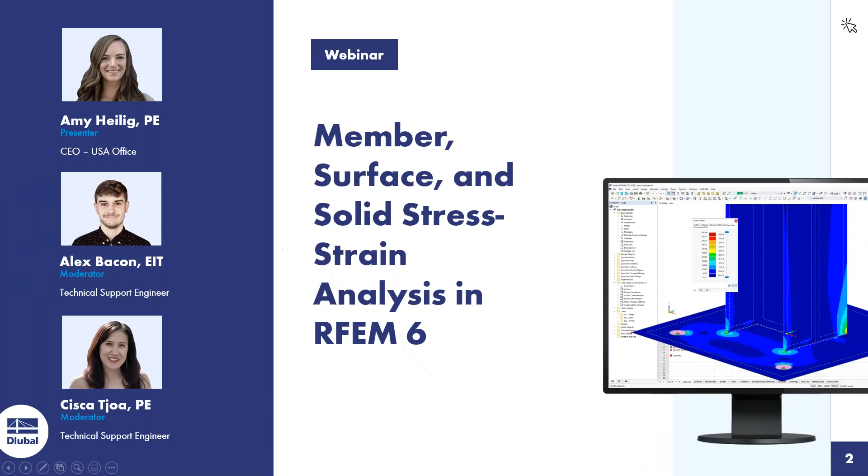Today we'll be working in our structural analysis and design software, RFEM. The topic for today's presentation is member, surface, and solid stress-strain analysis in RFEM 6.

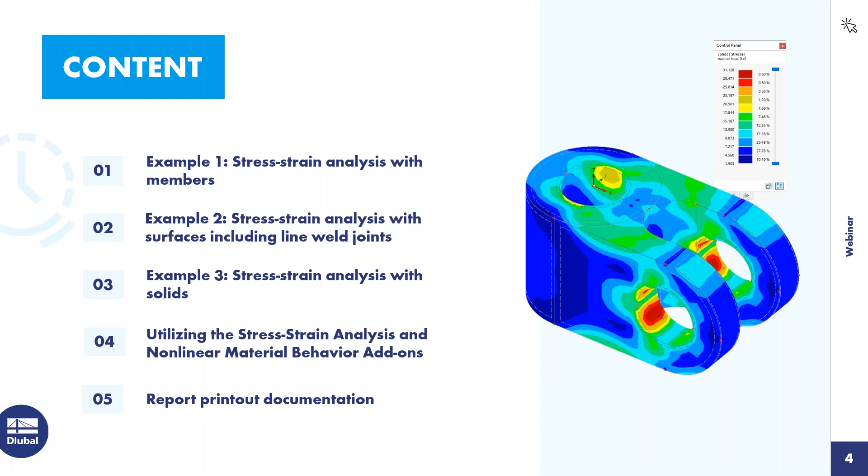Starting within our main program RFEM here, I've already created the first model and given it a model name. The type of model is set to 3D, and under the add-ons, this is where we want to activate the stress-strain analysis add-on.

These are all the multiple add-ons we could purchase with our RFEM license, so we'll be starting with this one for today. Once we've activated that, we can see our 1D member elements modeled here in the graphical window. If I turn this into wireframe view, these are all one-dimensional elements, representing some type of facade wall.

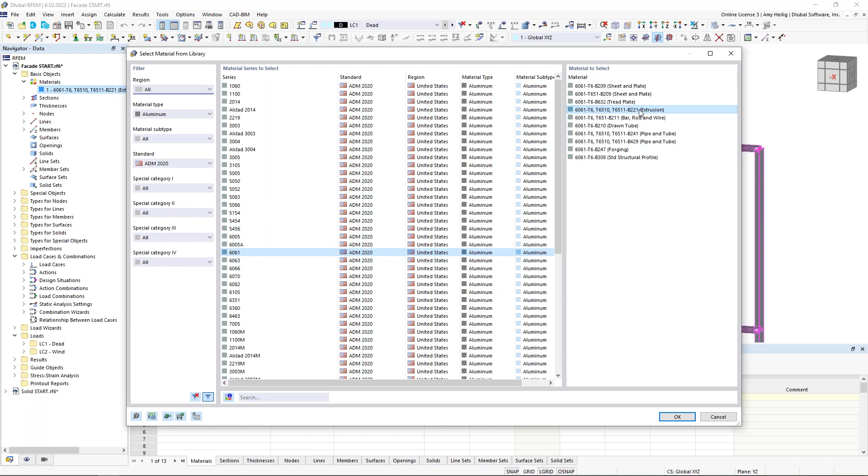I have defined the material here for all of these members as 6061 T6, which comes directly from the ADM standard. If we take a look at the material database, notice I use my filters on the left to filter to the ADM, and under the 6061 category, I chose this particular material for extrusions.

If we take a look at the cross sections defined within this model, we have a couple of them here. These are basic parametric sections where I can input the dimensions, and the program will automatically calculate the cross-section values for me. Same concept for the second cross-section, notice I just rotated it 90 degrees.

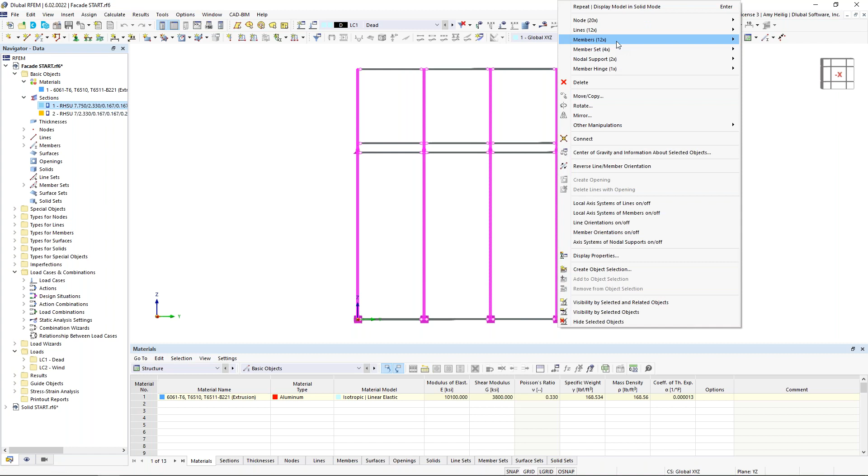I have modeled all of these members, and the program has gone ahead and broken some of these apart. Perhaps we'd like to design these columns as one continuous member. Even though those members are broken apart, it's not a problem, as we can create what's called member sets. If we highlight all of these single elements and want to design them as one continuous member, we can right-click, and under the member option, we have create member set. The program will automatically group all of those together, and now we see them available in our navigator on the left.

I also want to go back to our base data by right-clicking on the model name. Under the settings and options, I'm going to turn on the member representative and the member set representative. Notice we have a couple additional tabs at the top. The program can group together members that have similar materials, cross-sections, lengths, as well as several other options. Once we activate these member representatives, we also see them available on the left-hand side. If I turn this into wireframe view, we'll also see red and blue symbols grouping those similar members together.

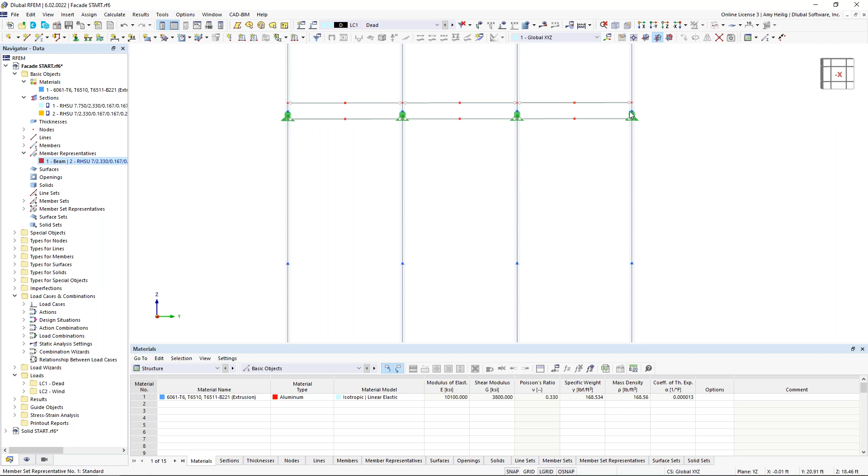This will come into play later on with our stress design. I've also applied a couple of supports here. You'll notice the nodal supports applied at the center line of these small segments, and then we have a sliding nodal support down here at the bottom. Now moving on to the loads.

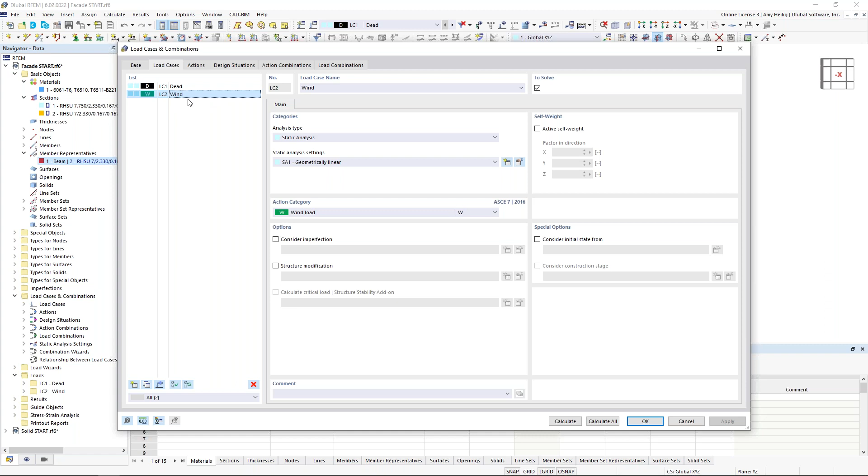I have created two basic load cases for our facade wall here, just a basic dead load. Notice self-weight is active, and I've also created a wind load case. Once those load cases are created within this dialog box, we would actually apply the loads to the structure, and for the sake of time, I went ahead and did that.

If we turn on our loads for dead load, you can see that this facade wall is likely going to be supporting some type of glass panel. So I wanted to attach the glass panel and represent them as basic point loads along these horizontal members. If we double click on these loads, you'll see here that we can set the load type to force, but the load distribution is set to concentrated, where I can set the number of point loads along the member length. So I set the magnitude here at -0.8 kips in the global Z direction, with 2 point loads along the member length set at a distance of 10% of the member length, then an additional 80% of the member length.

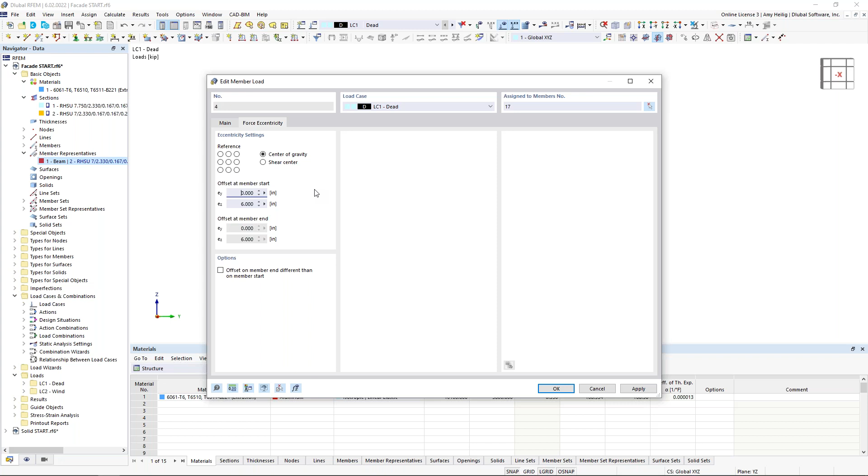With these glass panels that we're trying to represent, perhaps they're not necessarily applied right at the center of these members. So we have the ability here to turn on the eccentricity of these point loads, and now we get an additional tab here where we can apply an eccentricity. I've set this to 6 inches in the local Z direction of the member based off the center of gravity, so now we have an additional torsional moment applied to these members based on these glass panels being attached there. You can also modify this to the shear center as well.

I've applied these point loads not only to the bottom horizontal members, but you can see them applied up here, the upper members as well.

Moving on to the wind load, we can see that wind load generated here as a lateral load, and I took advantage of our load wizard over here in the project navigator and what's called the member loads from area load. If we take a look at this applied load, you can see here that I've set the load direction in the global X direction based on the global axes. The load magnitude is set at 0.02 kips per square foot.

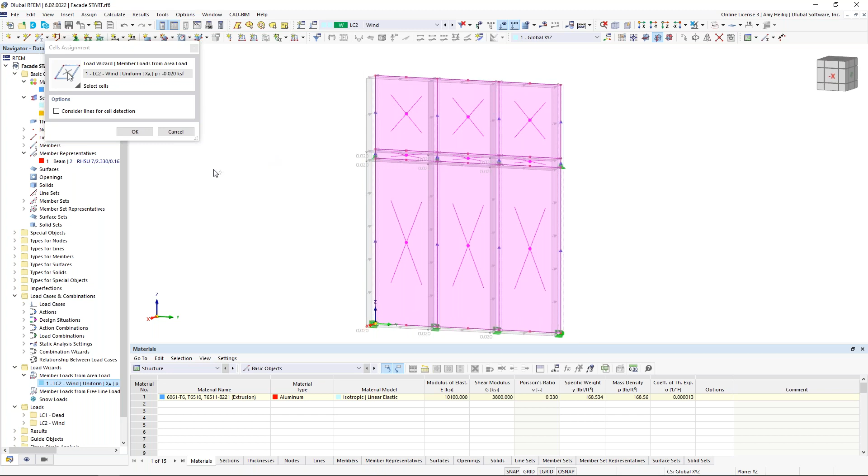Under the second tab, this is where we have two options: either we could use the ability to select the corner points of the area load, or we can select the cells graphically. The program can actually detect here these closed cells between members, and we can graphically select them with our selection options. When we do this, all of those cells are automatically populated within this table. So what we'll see here is that applied lateral area load based on a closed area for these members shown here graphically, and we can always right click on this load to display separately.

Essentially this is going to be the member loads that are applied based on the tributary area of each one of these members, but we can always right click here to uncheck this display separately for a little bit of a cleaner look there.

Now that the loads have been applied to the structure, let us go back into our load cases and combinations, and we're gonna back up a step under this base data. Currently I'm generating the load combinations automatically according to the ASCE 7, but you can see here we can select the NBC, Eurocode, and many other international standards. When this option is checked, those load combinations will be automatically generated according to the standard.

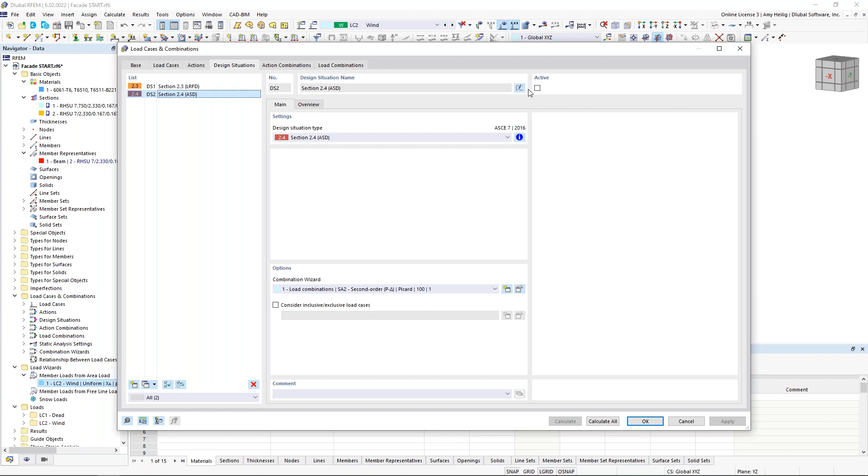The design situations are really important. We have two design situations automatically created: LRFD for our factored load combinations and ASD for our unfactored load combinations. Notice we activate these design situations for the add-ons, so the add-on that we turn on, remember, was the stress strain analysis. We'll be using this design situation once we get into that add-on for the design portion. Now, if I'm not so interested in my unfactored load combinations, let's say serviceability is not really a concern, we can delete this design situation, or we can simply deactivate it up here in the upper right-hand corner.

Under the last tab, the load combinations, this is where we see the load combinations individually listed out based on the ASCE 7 and only according to the load cases we have defined: dead load and wind load.

Now that the load combinations as well as the design situations are set, what we'd like to move on to is the stress strain design configuration. We're technically ready to run the analysis, but the huge advantage of RFEM 6 is the integration of these design add-ons so that we can run one continuous workflow.

What I'd like to do is right click on my folder here to collapse all these folders so maybe it's not so overwhelming. Because we've activated the stress strain analysis add-on, we now see an additional folder on the left, and included in this list is what's called the member configurations. We'll double click on this to take a look at the default options. Notice these are all of the available stresses we can calculate for these members.

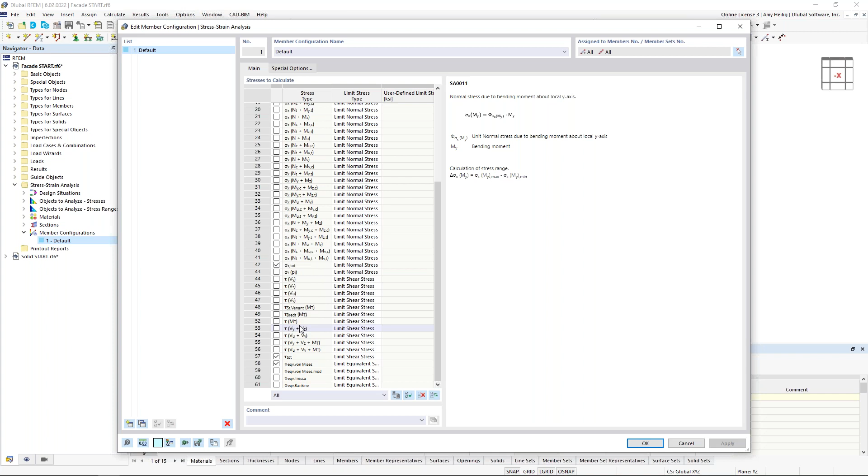That includes normal stresses based on axial loads and bending loads, and the list is rather long, but we've taken the liberty to suggest a few of these stresses you might be most interested in. For our example today, let's assume we're only interested in designing the von Mises stresses.

So when I take a look at this, I make sure my checkbox is on, and notice for all these stresses, the equations along with the variables are listed over here on the right. In the second column here is where we set the limit stress type.

Currently it's set to the limit equivalent stress. What this means is the program is going to refer to that ADM material to determine what the limiting stress value is. Alternatively, we can set this to user defined, and simply type in the user defined limit in this third column. But let's leave this for now set at the limit equivalent stress.

The other nice thing about these configurations is that we can give this one a name. We'll call it von Mises. We don't necessarily have to apply the same configuration to every single member in the model.

So if I'm interested in applying the von Mises here only to my vertical members, I can graphically select them here, and once I click OK, we'll see those members populated in the upper right-hand corner.

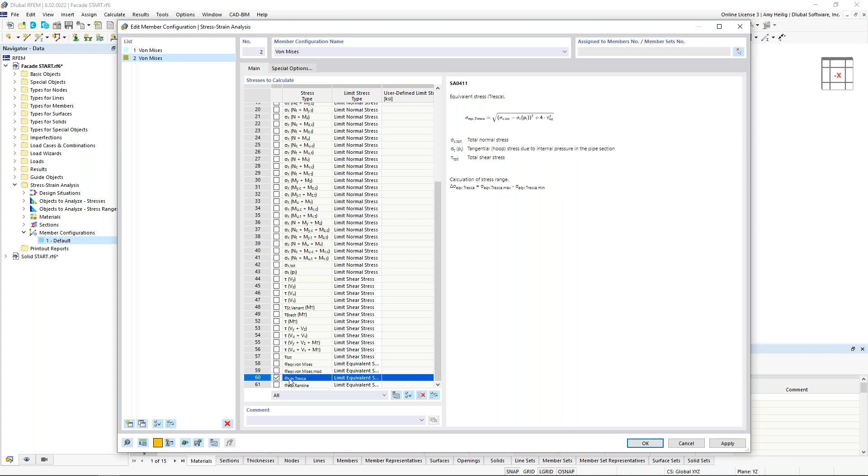Now I can make a copy of this configuration, and instead of von Mises, let's turn on the equivalent stresses based on the Tresca hypothesis theory. We see the relevant equation here that will be used. We can give this one a name: Tresca.

And we're going to assign it to all of our horizontal members, so we can select these members one by one using our selection box. Once we're done with this, we click OK and see the members populated in the upper right-hand corner.

So we're now ready to run our calculation. We can go to calculate, calculate all. The program will generate the mesh, move through the load cases and combinations for the static analysis, and then move through the stress design.

Once this calculation is done running, you'll notice we can view any one of these load combinations, for example, from our drop-down menu. Over on the left, we have both the static analysis and the stress strain analysis. So if we start off with the static analysis, we can view information like our global deformations and support reactions.

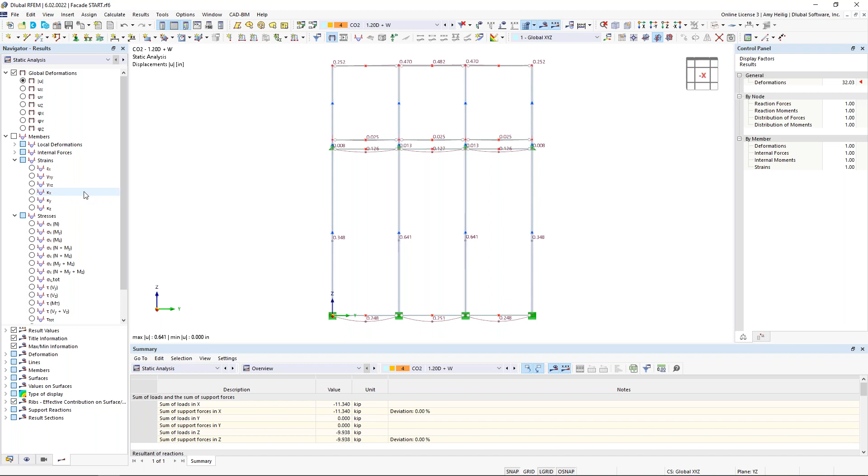But of course we're also interested here in all of the available stresses, so we can view these on the member, including normal stresses, shear stresses, and of course the von Mises stresses. Again, this is the static portion of the analysis.

But we're also interested in the stress design based on those configurations we've just set. So we can jump to the stress strain analysis within this dropdown, and if we take a look at our table results, you'll notice we actually get an error for each one of these stress ratios. It simply says non-designable.

So we'd like to take a look at this in a little more detail. I'm going to go into my result details here, and this gives me a bit more information. It tells me: no limiting stress defined, please correct in the member configurations.

Well, if we refer back to our aluminum material, I'll visit this here under the basic objects, the materials, and take a look.

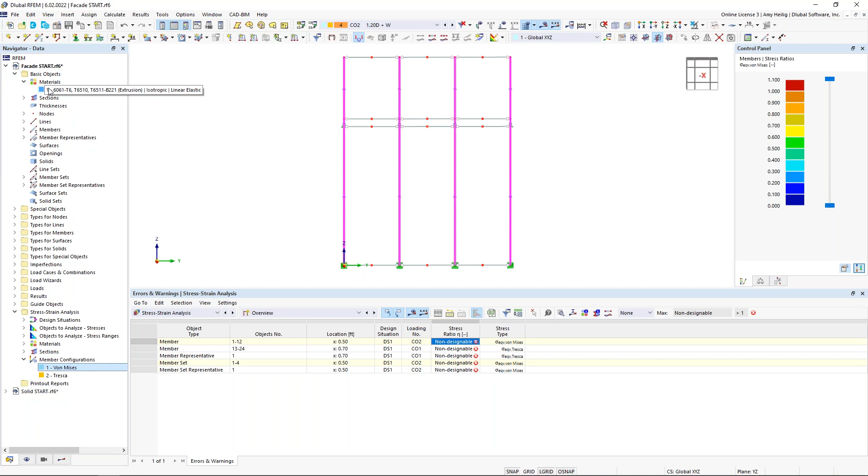You'll notice that the material values have many different values set here under the strengths, depending on if the member is in tension, compression, shear, and so on. So aluminum materials are a little bit different than, say, what we would see with steel. A36, for example, has a very clear yield strength of 36 KSI, but aluminum ADM materials do not. So the program simply doesn't know which one of these to refer to.

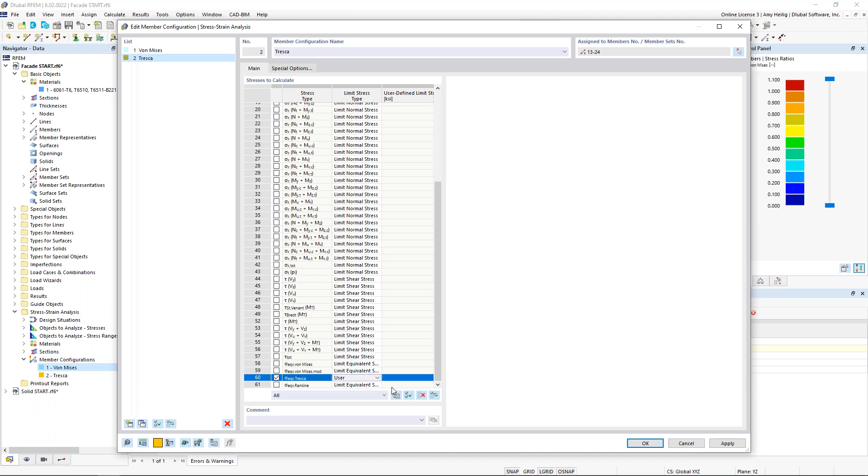So we can easily fix that here by going back to our member configurations. And under our von Mises configuration, instead of using the limit equivalent stress, perhaps we set this to user defined instead, and we pick one of those strength values for that ADM material, such as 35 KSI. And under the Tresca, we need to do the same thing, so we'll set this to user defined, and we'll also set this to 35 KSI. And we click OK.

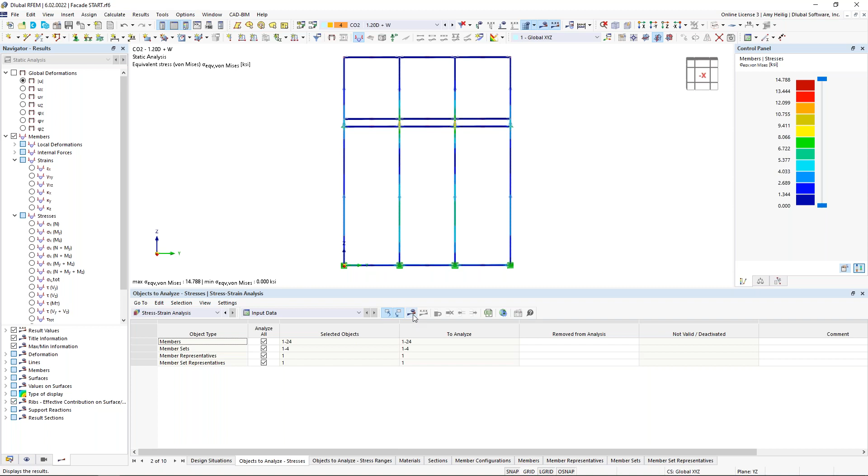So if we revisit here our stress strain analysis, we see here our input data, and we see the design situation. Remember that LRFD design situation, and we're designing all of our members. So our static analysis remains the same here, but we do need to rerun the design portion according to this add-on.

So we'll go ahead and initiate that, and now we should see some results here available in our table format. And we can take a look within this dropdown, the stresses on members. So we look at the tab here, stresses on members, and sure enough, we have our column here of existing stresses for each of these members, but we also have the limiting stress of that 35 KSI, and ultimately we're getting a stress design ratio.

Now we also can view these stresses by member set. So remember those continuous members that we created for these vertical columns, we're also going to see our stress design ratios for each one of these continuous members. If you also remember, we activated the member representative, and we're only getting one value here.

And we can think of this more so as an envelope solution. So we're grouping together all of those horizontal members, and we're going to give you one value here for the existing stress, the limiting stress, and the stress design ratio. Same concept for the member set representatives.

The other thing that we can view for any one of these results here in our table format is to take a look back at these result details. If you remember, this is where we got more information about our error message, but now that it solves, what we actually see is the stress ratio. We see that same equation given to us on how we're going to calculate, for example, the von Mises stresses. We see all of our variables given.

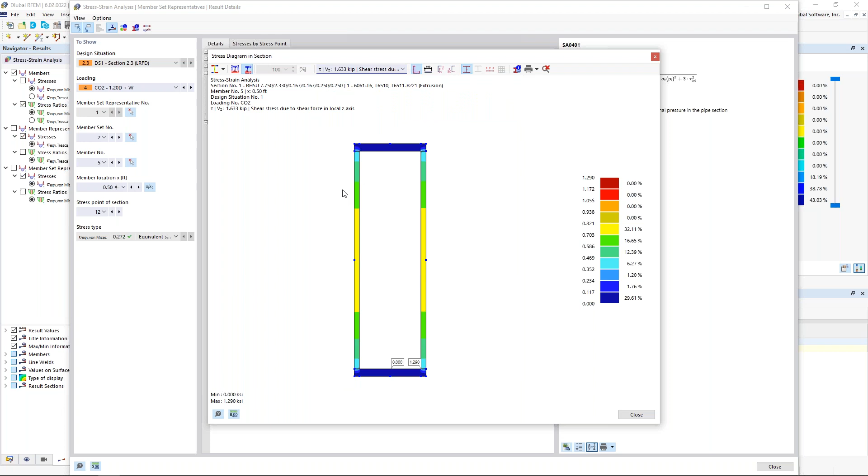And the stresses option is going to allow me to view all of the normal stresses. Perhaps I want to take a look at the shear stresses. So we can add this information to our printout report and just get a little bit more information about what's going on for this particular section at this X location.

Now, of course, in addition to the table format, we have all of our information shown graphically here under the stress strain analysis. For example, we can view the stress design ratios that are currently turned on according to Tresca, or perhaps we want to turn on the stress ratios according to the von Mises.

Okay, so that will wrap up this first example with one-dimensional members.

For our second example, I'm actually going to create a new file because we will model this one from scratch. Pretty basic structure, so we'll give this the model name of base plate, whatever that may be. And the type of model will be set to 3D. And under the add-ons, again, we want to activate the stress strain analysis. And we're also going to activate for this second example, the nonlinear material behavior.

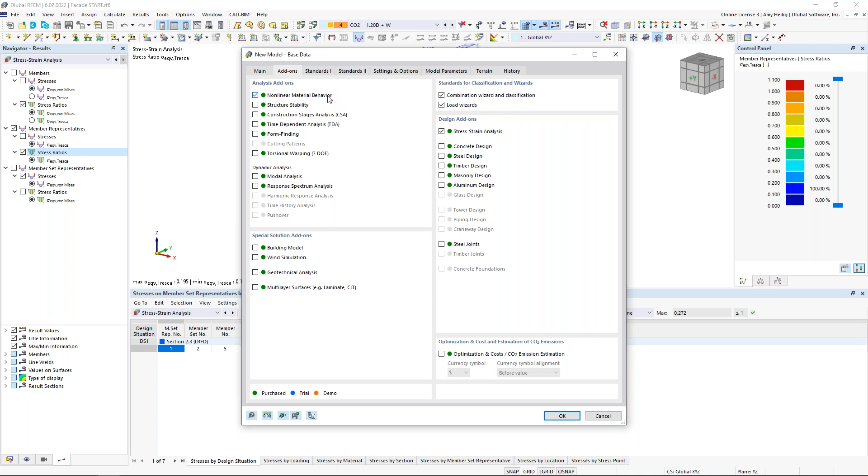So we'll get into this a little bit later on, and we can click OK. Now we're presented with a brand new model here within RFEM.

The first thing I'd like to do is right click on my grid settings down here at the bottom. Currently everything is based on a spacing of 1 foot. I'm going to go into my units, and instead of using feet, I'll change this to inches since we're working at a much smaller scale. I click OK, and instead of the grid point spacing at every 12 inches, we'll set this to every 1 inch, and click OK.

So we zoom in here, and now we see our much smaller drawing grid. We'll begin by drawing a new surface within our toolbar up here, and we'll choose rectangle via center.

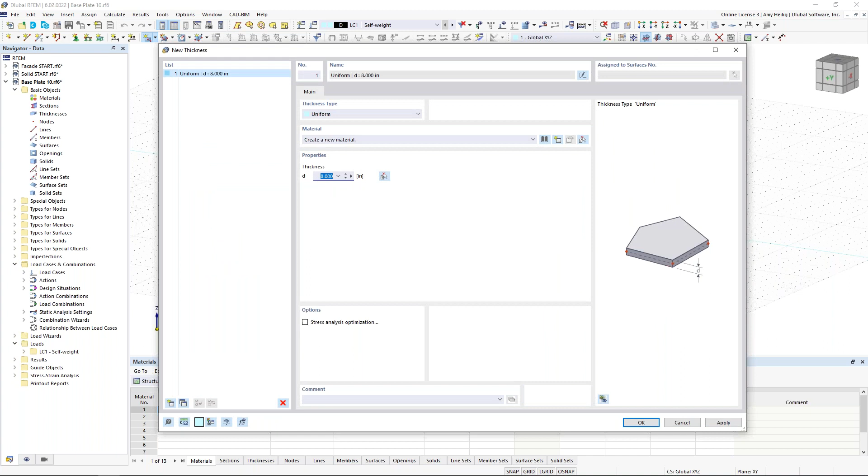We need to generate a new thickness and material for this surface, so we create a new definition type here. The thickness is going to be set at 0.5 inches, and we need to create a new material from our material database. We can use our filters on the left to choose steel, the AISC 360, for example, and choose A36 for plates. Now that this thickness and material have been defined, I can click OK through these dialog boxes.

I will snap at the origin here, and make my second click at a point of 10 inches in both the X and Y directions, and we have our first 2D surface element generated here.

Now I'd like to add in some openings. This will essentially be our base plate, and we add the openings to represent where those bolts will connect the base plate to the underside of the surface.

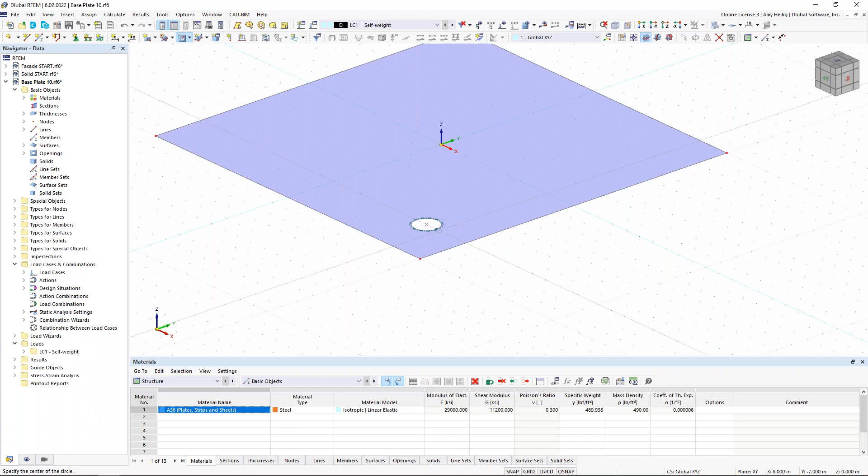We can do so in a similar manner by creating a new opening, and we'll choose the circle option. Then I can simply click directly on my drawing grid, and set my radius by typing it on my keyboard, such as 0.75 inches. I hit enter, and now we see that opening generated here on the surface.

I'm going to represent my bolt elements with a new nodal support. So I create a node to begin with by directly clicking right at the center of that opening. I right click to exit, and we're going to create a new nodal support.

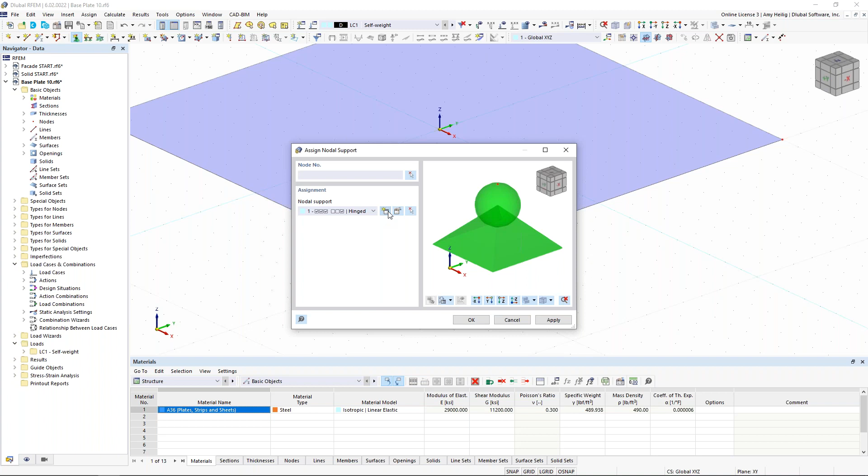I'm going to generate a new nodal support definition here as well. What I'd like to do is restrain translation in the global X, Y, and Z directions, but release rotation about those global X, Y, Z. So this pin nodal support is going to represent that bolt taking over those tension forces. I click OK once again.

I'll snap here to that newly generated node. I right click, and we can even right click on the display of this nodal support to decrease the size to something much smaller, so it kind of fits in with the size of our base plate here.

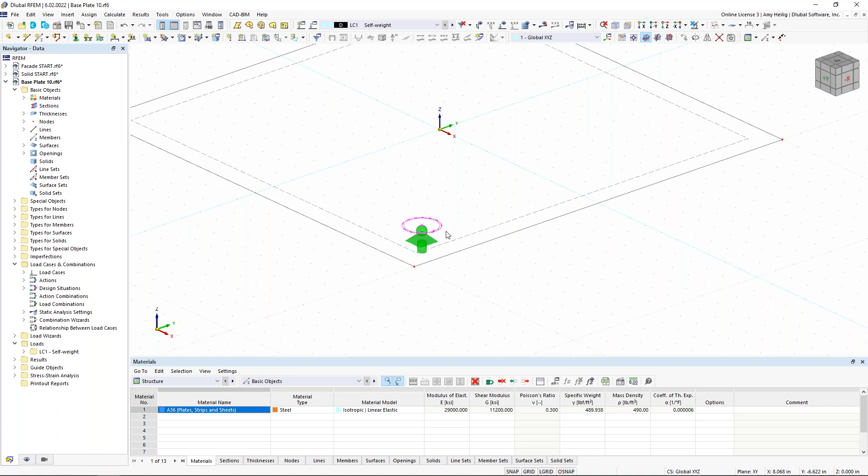I'll convert this to wireframe view, and highlight all of these elements that I just generated. What I want to do is make a copy of the opening and the nodal support. So we'll go to our rotate copy tool. We will create 3 copies, rotating 90 degrees about the origin. We click OK, and now we can see the rest of those openings and nodal supports generated here.

Now, the problem is that none of these nodal supports are currently connected to the base plate. That's just because they're sitting in the middle of these openings, but it's not a problem because what we can do here is choose the option to create a new surface by selecting the boundary lines.

Instead of the stiffness type being set to standard, we can choose this option here, rigid. So we'll fill in those openings with a rigid surface. Notice I don't set a thickness, I don't set a material. That's simply because the stiffness is really, really high for this particular stiffness type. So when I click OK, I can simply click around these openings here to essentially connect that nodal support back to the base plate.

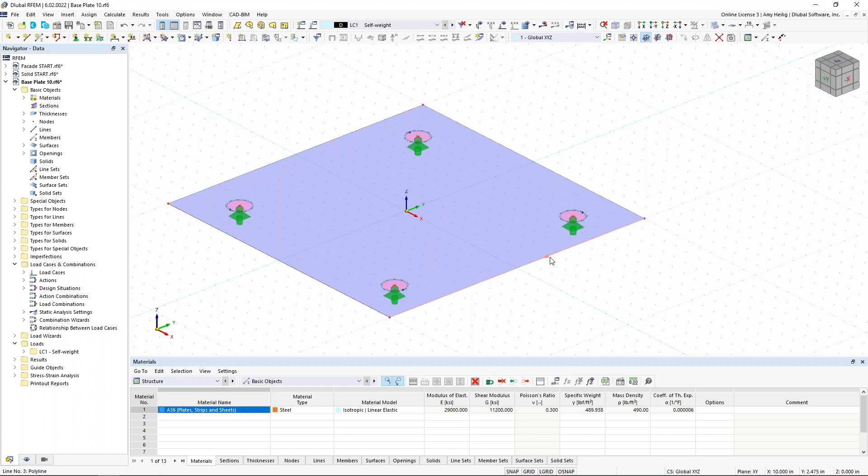So now we'd like to move on to modeling the column element. There are many different ways to do this, but I'd like to show you a quick trick we have in the program. I'm going to modify my drawing grid in the vertical direction, which we can see clearly in our graphical window, and create a new single member, exactly like what we just saw in the previous example. It's a one-dimensional element, so under section is where we create a new cross section.

Instead of one of these parametric sections, I'll take advantage of a standardized section, which allows me to once again use my filters similar to our materials on the left-hand side. I can filter, for example, to AISC 15, and choose a W shape. We scroll all the way to the bottom since all the shapes are listed, and choose a W8 by 35.

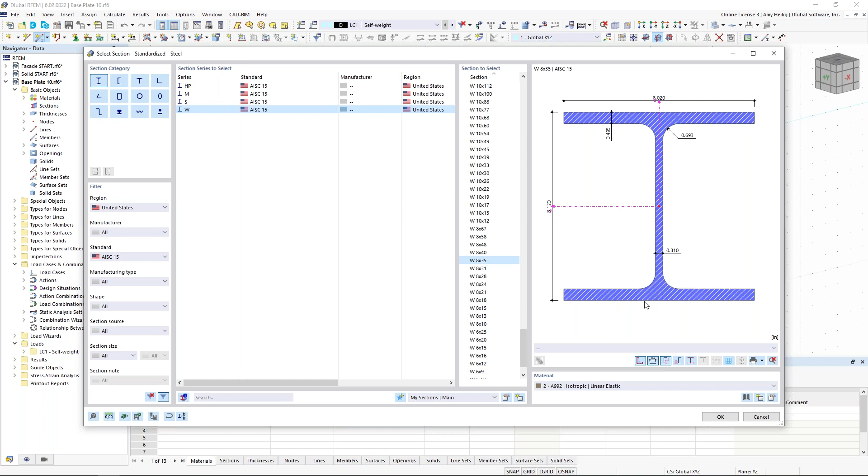Now we also need to generate a new material, so we access our material database once again using our filters on the left, but this time choose A992. Click OK, and that new material is now associated with this W8 by 35. I click OK, and through these dialog boxes I snap at the origin, with my second point up here at 40 inches in the vertical direction, and we have our column generated.

But the problem is, when I turn this to wireframe view, this member is just a one-dimensional element modeled at the centroid. We want to convert this to 2D surfaces so we can do an in-depth stress analysis and design. In the program we can right-click on this member, and under the members menu, generate the surfaces from that W8 by 35. Notice everything was converted to those 2D surfaces - the flanges, the web, everything from the W8 by 35, including the thickness as well as the material - so we don't need to make any modifications, assuming we still want that same cross section.

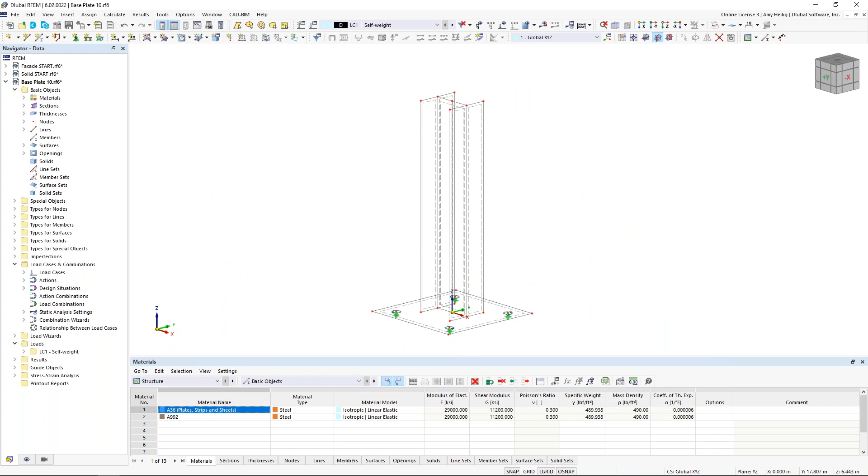Now that we have modeled this column, we need to apply a surface support down here at the bottom. With downward deflection, this base plate is going to bear on some other type of surface that we didn't model today. But in uplift, we want that surface support to fail, and instead we would expect our bolts, represented here with our nodal supports, to take over those tension forces.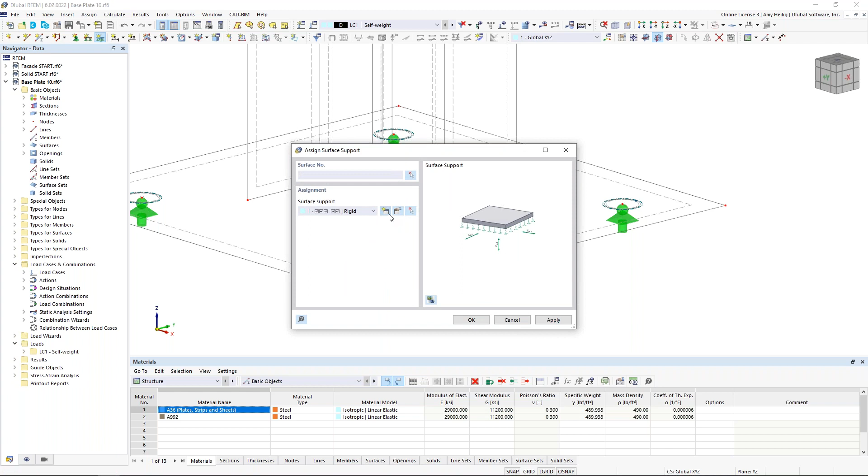So we create a new surface support within our tools, and create a new definition type. We'll restrain the shear based on the local XZ and YZ axes of this surface. For my vertical translation, based on the local Z axis, I'll set a spring constant of 1e6. It's really recommended in almost all cases with a surface support not to fully fix it in the vertical direction - we get better convergence in the calculation when we set a spring constant instead.

And of course we want to take advantage of this nonlinearity. RFEM is a nonlinear analysis program, and all geometric nonlinearities are automatically included in the base program. So this is where we can set failure if positive contact stress occurs in the vertical direction. With uplift, we should see that support completely fail, but with downward deflection, that support will be engaged again. We click OK, snap on that base plate, and see the surface support applied here.

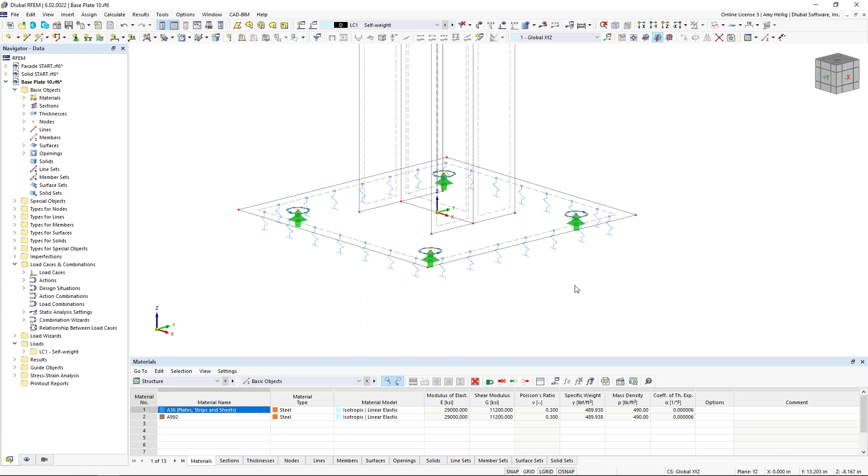Similar to the nodal supports, we can right-click and use our slider to decrease the size of this, and we can also increase or decrease the number of elements we're seeing here depending on what we see fit for our model. All right, so essentially the modeling portion is complete.

Let's touch on the FE mesh. If I go to calculate, generate mesh, you'll see that the mesh is entirely too big - we're getting very few mesh points, which in turn is not going to be an accurate analysis. So it's very clear that we need to refine this FE mesh.

Once again going to calculate, we have mesh settings. Instead of the default 1 foot or 12 inches for the target length, we can set this to something much smaller, such as 1 inch. I click OK and apply, and the program will generate that FE mesh, which looks much better. But if I zoom in here on these openings, I really only have 4 mesh points around the circumference.

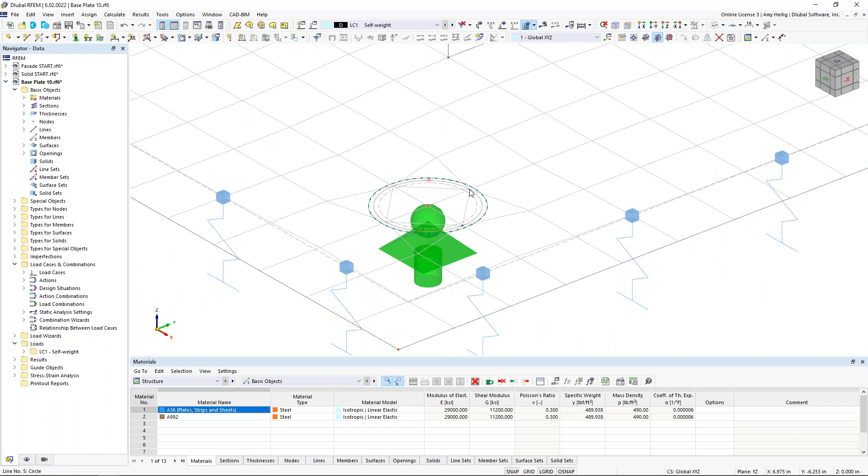Perhaps we want to refine the mesh a bit more around these openings. I can hold down my control key to select all 4 of these nodes, double click, and activate the mesh refinement under these node numbers. Now we get a new tab where I can create a new nodal mesh refinement. We set the radius of this nodal mesh refinement to 3 inches, the inner target length to 0.1 inches, but transition back to those global settings of 1 inch. I click OK twice, and now we see that FE mesh refinement symbol shown graphically within the model.

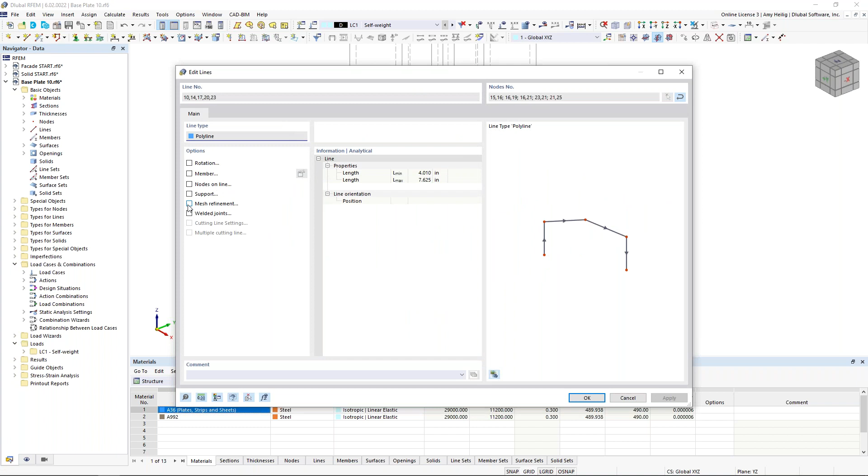Perhaps we'd like to do the same thing at the base of the column and refine the mesh a bit further around these lines. I hold down my control key to select all of them, double click to edit the line, and in a similar manner to our nodes, we can activate the mesh refinement for these particular lines. Under the mesh refinement, we create a new definition and set the target length to something like 0.2 inches. I click OK.

Then we can finally go to calculate, generate FE mesh, and we'll see a much more refined FE mesh at the base of the column as well as around those openings. So everything seems to be good to go now.

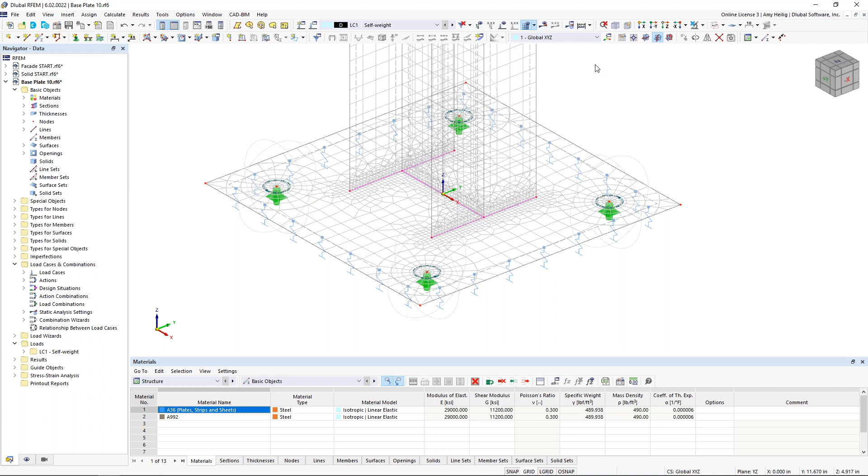Moving on to loading. Essentially what I'd like to do is visit my load cases and combinations. We have a default load case that's always created called self-weight. Let's go ahead and rename this one to dead load, and we can leave the self-weight active here. I'll create a second load case for our simple example today that will be live load, with the action category of live load. So now that these two load cases are generated, what we'd like to do is actually apply the loads to the structure.

The loads are going to be applied as a point load at the top of this column. But the problem is if we apply a point load as the model is now, we're going to get a singularity because that load isn't going to be distributed over the entire face for the top of this column.

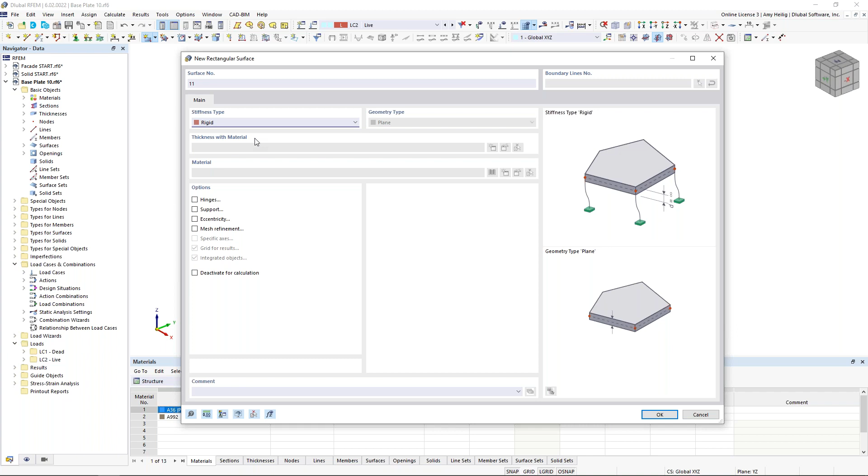We can fix this by drawing a new surface yet again, and the type will be rectangle. We're going to set the stiffness type to rigid, since we're familiar with this rigid type already — we set it at the openings where our bolts are located, so we'll use the same stiffness type here. I click OK, click once on the left of the structure and a second time on the right of the structure. If we turn this to a rendered view, we can see that rigid surface shown here.

Now I can create my first point load by activating a new nodal load. I get my dialog box where I can change my load case to dead load, and set the force as -20 kips in the global Z direction, and graphically choose which node to apply it to — node number 14. If I hit apply and next, the program will automatically apply that load in the background.

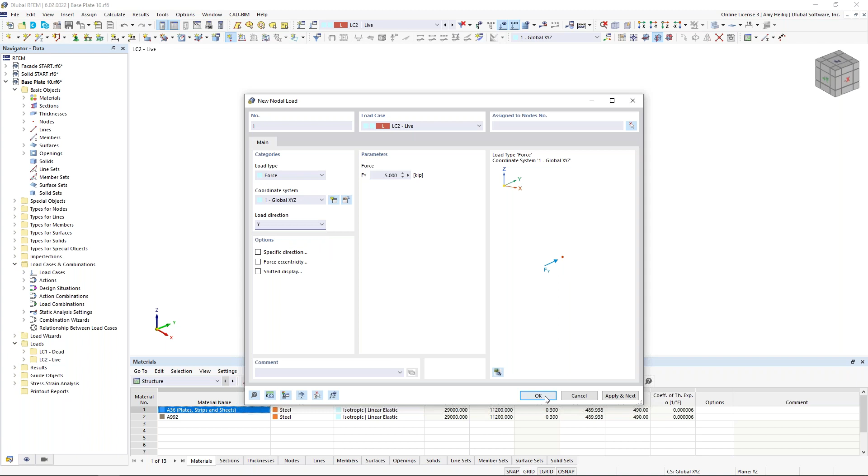But I'm still within the same dialog box, so I can use my dropdown to choose live load, modify this magnitude to 5 kips in the global Y direction. I click OK, select this node, click OK once again, and we see that lateral load applied here. So going back to dead load and live load, both of those loads should be sufficient.

Going back into our load cases and combinations, we've created these load cases, but we want to combine them into a load combination, and we also need to check our design situations. Under the base data, if we'd rather manually create those load combinations instead, all we need to do is simply turn off the combination wizard, and notice a few of those tabs disappeared here at the top.

This gives me the ability to still create these design situations, which were automatically generated based on the ASCE 7. But perhaps I'm not interested in my ASD design situation — I can completely delete it. I can even take this design situation here and rename it if I'd like.

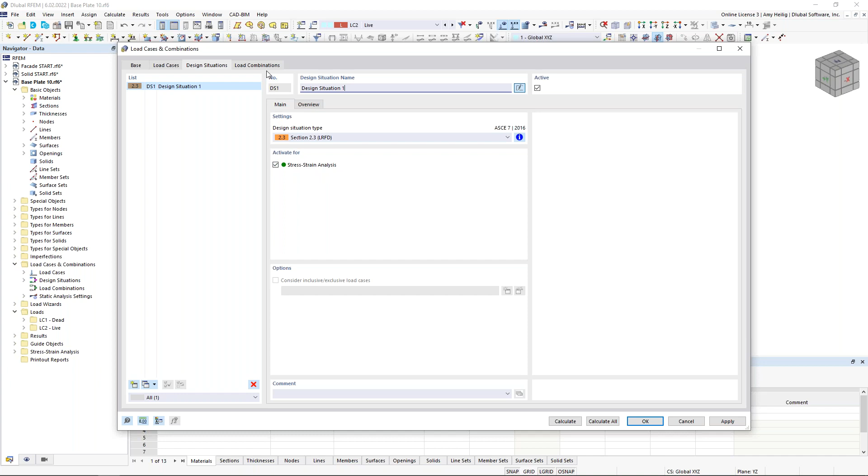So we'll call this one design situation 1. It's a little bit more code independent, but it's still active for this stress strain analysis. Remember, we have to have a design situation that all of the load combinations are placed under for these add-ons. Looking at our load combinations tab, it's empty because we need to manually create these. So I'll generate a new load combination here.

Perhaps we change the static analysis settings to linear first order rather than second order. Under the assignment, we can select both dead load and live load. We could adjust the load factors if we'd like, but we'll go ahead and leave this as a simple 1.0 dead plus 1.0 live. We click OK, and now we should see that load combination available to us along with both of those loads.

Being applied here graphically. All right, so let us talk about those stress strain configurations. Remember, because we have activated the stress strain analysis, we have this folder available to us on the left-hand side. I can right-click here to collapse all of those again so it's not as overwhelming. And the first thing I'd like to do is right-click on these settings for the stress strain analysis.

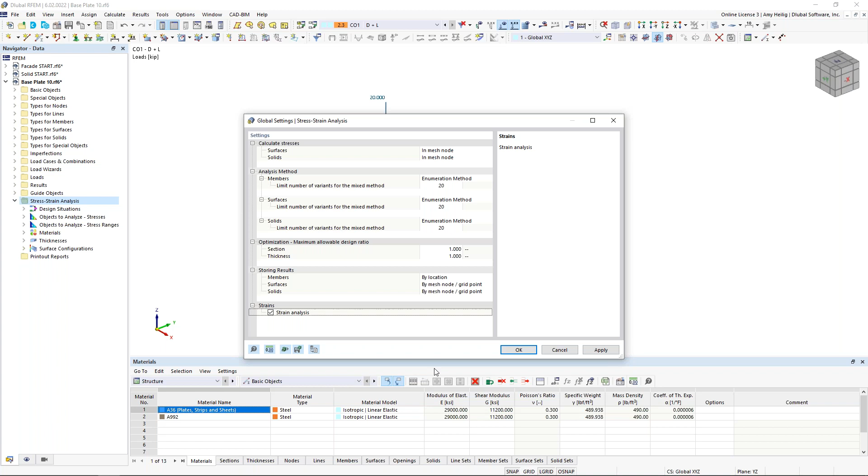Now, by default, in order to design the strain, it's actually turned off. We'll still get the strain analysis results in the static analysis portion, but as far as the design within this add-on, we can activate it here with the strain analysis. We'll see how that looks a bit different from our previous example. And I click OK. So now instead of member configurations here, we have surface configurations because we have only 2D elements within this model.

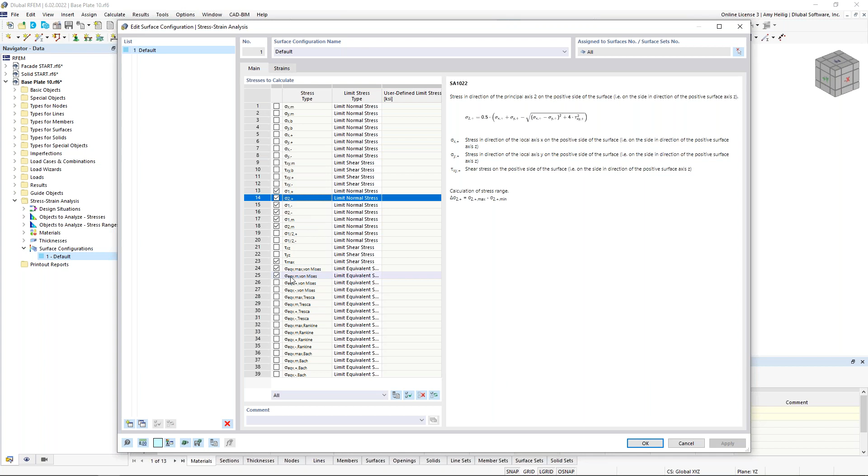So I take a look at my configuration details, and this list should be a little bit different than what we saw with our members. We see all of the available stresses we can calculate, the relevant formulas over here on the right-hand side. Again, we've taken the liberty to check a few of those we think you'd be most interested in. But for us, what I'd like to do today is to only activate the von Mises max.

And we see the equation given here, just to keep it simple for this particular example. Now, the limit equivalent stress that it's going to refer to, this should not be the same problem that we had with the ADM material. We know with A36 material, with A992, we only have one yield strength, so that should be fine for this example.

Notice under these strains, we have all of the available strains that we can go ahead and design as well. Now I'm going to turn most of these off. We'll only activate the von Mises strain. Notice you can set here the plastic strain limit. This strain limit is only applicable when we're actually doing a plastic nonlinear material design, which we will be in just a minute, but just know that the second column is only available for that nonlinear analysis, not for the linear analysis, which is what we're currently under.

So this is going to be assigned to all of the surfaces. I click OK. If we want to take a look at here within our dropdown, the stress strain analysis input data, remember we have our single design situation here. The objects to analyze, all of my surfaces are turned on. We also can turn on what's called the stress ranges.

So we activate this for all of our surfaces. What this just means is that we'll be able to give you the minimum stress, the maximum stress, and the stress range for each one of those surfaces. We'll see what that looks like in just a minute. So we're now ready to run the calculation.

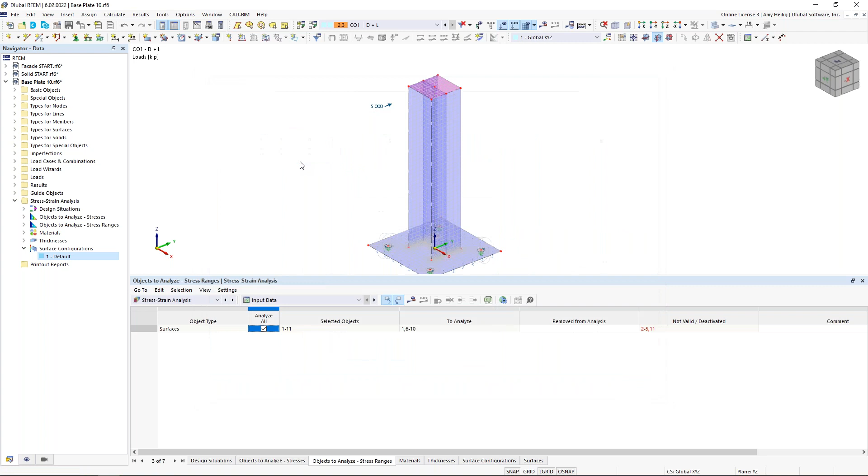So we're currently looking at our load combination, and we see here our static analysis results. And we currently have the deformation turned on, but we're probably, again, most interested here in topics like our surface stresses. And we can view the surface strains.

Now, again, with the static analysis, we have everything available to us. It's just the design portion that we limited to the equivalent von Mises stresses, for example. But we can take a look at here the static analysis for those von Mises stresses. And I scroll in here, we certainly have some high stress points.

These high peak points could maybe be attributed more to a singularity, but notice that the stress value here is 163 KSI. There's something I'd like to discuss further that's really important when viewing our results on these very small scales for these steel type connections.

Under Calculate Result Smoothing, these are the various options for how we're going to smooth the results so we can present them with ISO bands or colors available in our navigator. They can really affect the results and how we're viewing them depending on which setting we have set.

So what I'd like to do is go back to the PowerPoint to explain this in a bit more detail. Notice here for my example, I have two adjacent surfaces, surface 1 and surface 2, with the dividing line right down here in the center.

The second option is non-continuous. This is where we have a varying distribution over each element, so for each FE element we might have multiple colors, but there's still a non-continuous display between adjacent elements—each element is still independent from the one next to it. We display the corner values of each FE element at every FE mesh point, for a total of 4 values based on those 4 FE elements surrounding that single mesh point.

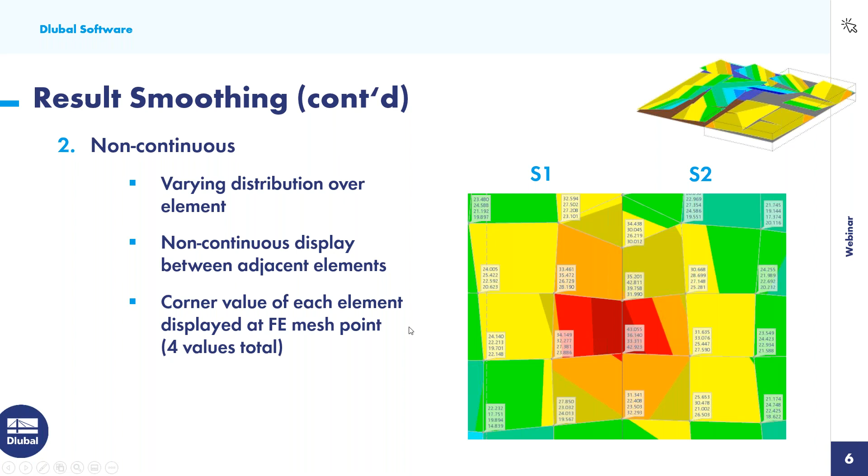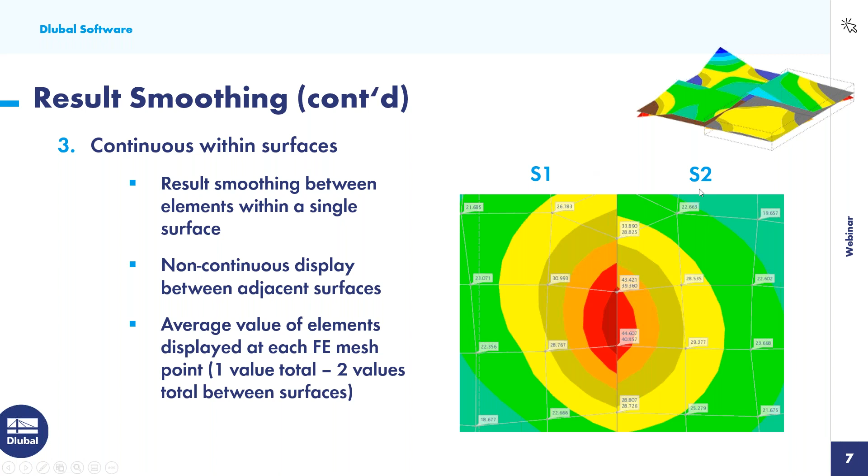The third option is continuous within surfaces. This is the default option and currently what we are viewing in our example today. We use a smoothing algorithm to smooth results between all elements within a single surface, so all the values in surface 1 are tied together, yet it's still a non-continuous display between adjacent surfaces—each surface is independent, and we don't tie those values together. The average value of the elements is displayed at every FE mesh point, so we have 1 total value for each surface, but 2 values where the 2 surfaces butt up against each other.

So let's go back to our example to see how this really affects our results and if it makes that much of a difference. The default option here is continuous within surface sets, or otherwise within surfaces, and our von Mises stress is 163 KSI.

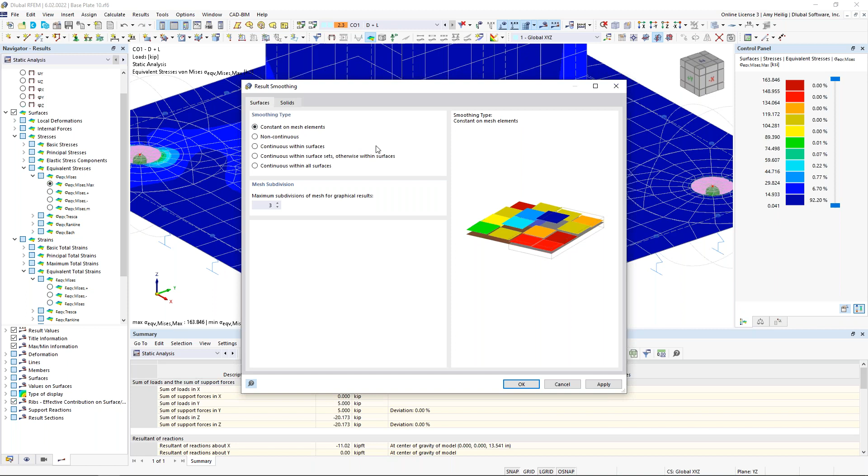I'm now going to modify this to constant on mesh elements. I click OK, and remember that's the first option we covered in the PowerPoint, where each FE mesh element has its own average value. Notice my von Mises stress is now 90 KSI. It was significantly reduced because we're no longer trying to tie all of those stresses together within a single surface. This is why it can really impact how we're viewing our results.

So now that we have changed this, notice I didn't need to rerun the static analysis. It's just really how our results are presented to us.

But what I would like to do is go to the stress strain analysis here, and we do need to rerun this calculation. The program says the stresses I need to compare have changed. So now we can view the stresses on the surface, and when I take a look, I have my existing stresses in my first column here, the limiting stresses, which are either 36 KSI for my A36 material or 50 KSI for A992.

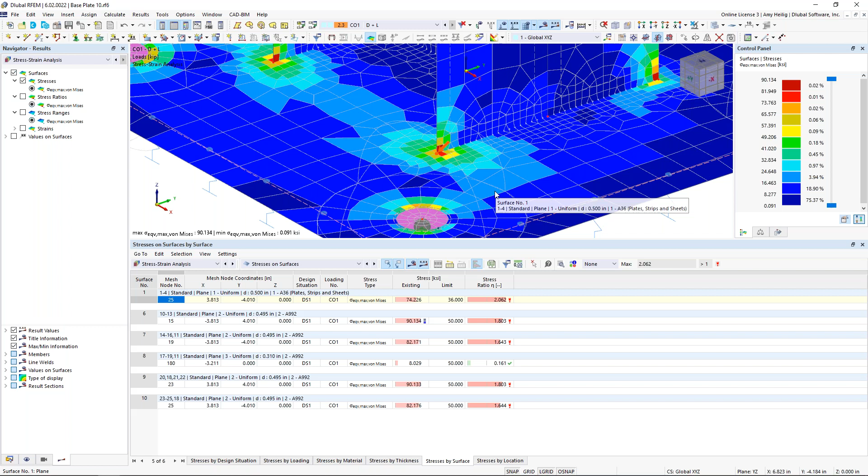And ultimately, we're getting a stress ratio. What we see here is the stress ratios are very high, 2.06 for example. We clearly know these materials are not going to be able to take on these high stresses - they're simply going to yield before we get to this point. So this might flag us that it might be ready to move on to a nonlinear material analysis instead.

And it's actually quite simple to make that change within the model. If we go back to our materials in the project navigator and take a look at the materials tree, in particular A36, I double click on this material, and you'll notice the default material model is isotropic linear elastic - just a simple linear material default in the program.

But if you remember, under the base data, I activated the nonlinear material behavior add-on. This add-on now releases all of the nonlinear material models, and for us, we're going to take advantage of this isotropic plastic for surfaces.

Now under the second tab, we can see the yield strength is set at 36 KSI, so essentially none of those FE elements should exceed this 36 KSI. Under A992, we can make that same change by changing it to an isotropic plastic, and notice under our second tab, we have a yield strength here of 50 KSI.

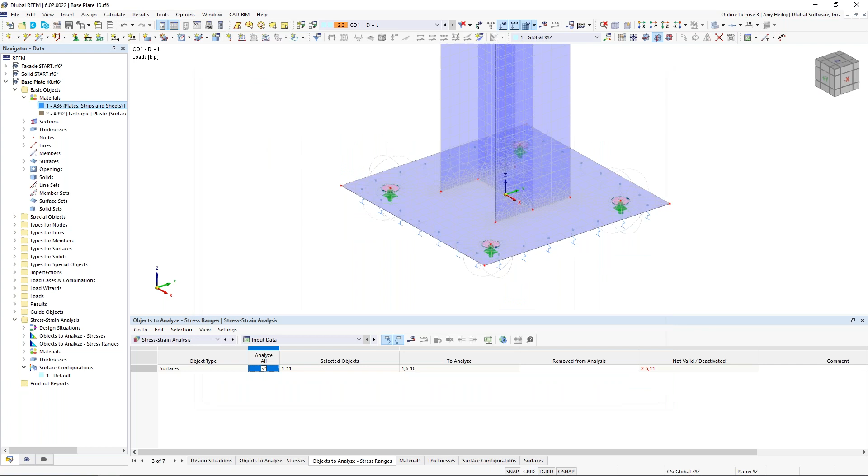So once we have made that change, all we need to do is rerun the calculation. The program needs to go back through the static analysis, and it's also going to go back through the stress strain design. You'll notice it takes just a split second longer here because we now have a nonlinear material.

But ultimately, reviewing the static analysis for this load combination, we go back to our von Mises stresses, and maybe I isolate this based on our base plate here for visibility. And sure enough, I look at my highest stress here and it's 35.997. So nothing is exceeding that 36 KSI.

Essentially, with this nonlinear material analysis, the program is going to apply the load. When that FE element reaches the yield strength, then the load is going to be distributed to the adjacent elements. It continues to do so until the load is fully distributed.

And we can actually see within our static analysis as well, the option for the criteria. So we activate the criteria and the program will tell us exactly which elements have fully yielded.

Perhaps we go back to our von Mises stresses and maybe I show the reverse visibility here, so we're only viewing our columns. And again, the highest stress is 49.819. I should never see any of those element stresses higher than that 50 KSI.

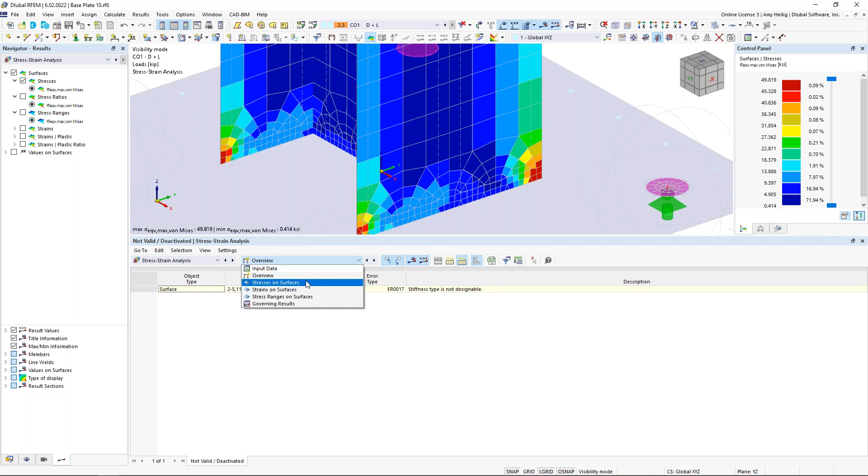So that's as far as the static analysis, but under the stress strain analysis for the actual design, we can view the stresses on the surface, and I'll cancel out my visibility so everything's visible in my table. I would also expect not to see any stress design ratio higher than 1.0.

So within the existing stresses is this column here, the limiting stresses either 36 or 50 KSI, and here are the stress design ratios: 1.0, 0.996, 0.989. Again, because we're never exceeding that limiting strength.

So within these table settings, we also can view the strains on surfaces. Remember, we activated that, so we see the existing strains, but we also have that limit that we have input in, which is only applicable for the nonlinear material analysis. And then we get a strain plastic design ratio here as well.

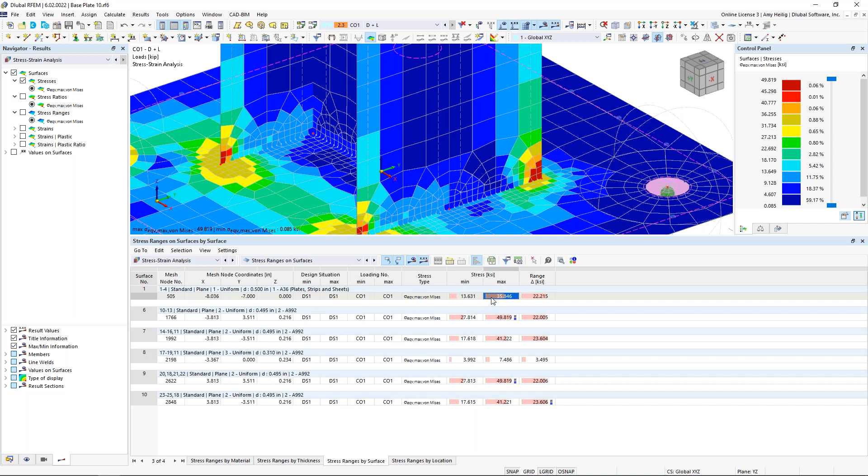And lastly, remember the stress ranges on surfaces - I said that we could activate this. We will show the minimum stress with each surface, the maximum stress, and then the total range here. Everything's synced up in the background here, and we can see that red arrow showing us exactly where those high stress points are. And of course, we can view everything graphically here, such as our stress ranges.

We can view the stress design ratios. Remember, that's because we use this drop down here for the stress strain analysis, which really encompasses the nonlinear material analysis.

The final thing I want to cover with this particular model is a new feature within RFEM 6. I'll go ahead and turn off my results here, and also turn off my FE mesh so this is a little bit more visible. We want to take advantage under this option, folder option types for lines, of the new feature: line welded joints.

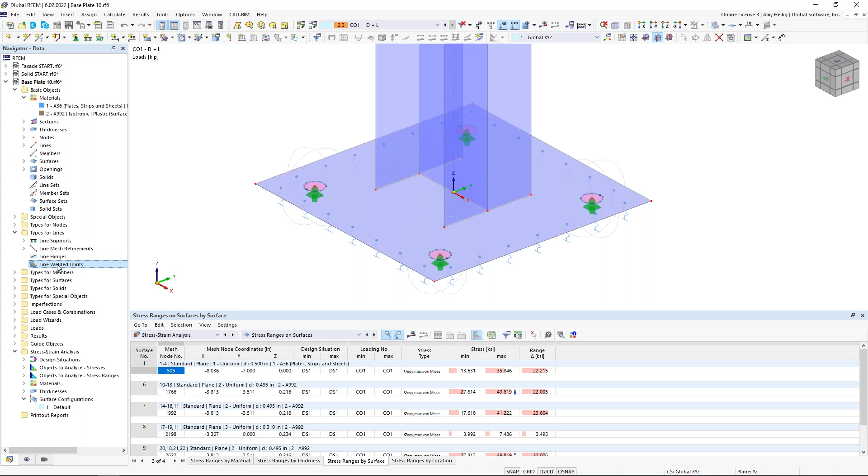This is really a post-processing tool that we can use to do the weld design. We're not modeling in the welds for the analysis, but rather we can take advantage of the program calculating the stress flow between surfaces, and we can set our weld joint here and give it the input data. We can also set the limiting stress value to actually get a design ratio for these welds as well.

So let us take a look at what this encompasses. We activate line welded joints and we have our first definition type. The first joint type is a butt joint, but we also have a corner joint, and notice this picture updates over here on the right. We have a lap joint, and finally a T-joint, which is what we'll be utilizing today based on a double fillet. So what we will do is specify the weld size.

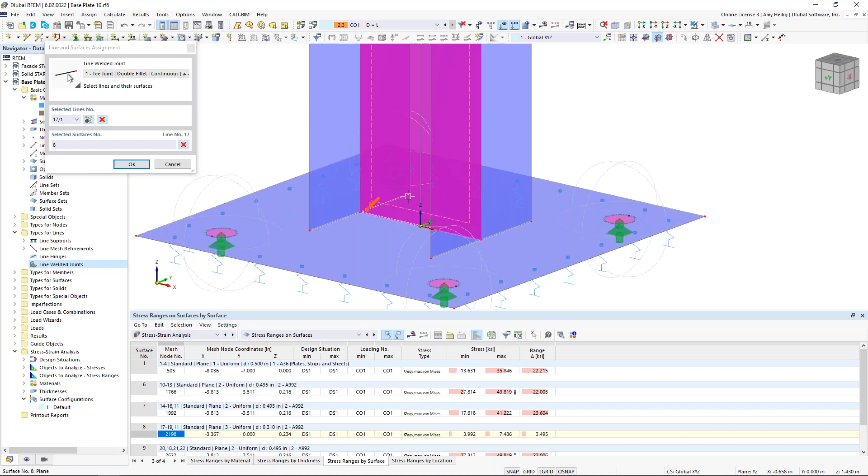Perhaps I set this at 0.167 inches, and then I can graphically assign this weld to a line in my model. We'll begin with the web that is going to be welded onto the base plate. Then I need to select my surfaces: first I choose this vertical surface, then my second click is the surface it's being welded to. So the order that you choose these surfaces does matter. We'll go ahead and choose surface number 8, then 1, and click OK.

Well, I can make a copy of this line welded joint, and what I'd like to do here is modify the weld size to maybe something slightly larger, 0.25 inches. Then I'm going to choose the line of my upper left flange. I choose my vertical surface first, my horizontal surface second, but I can remain within this dialog box to add a new object. Now I can rotate this around here.

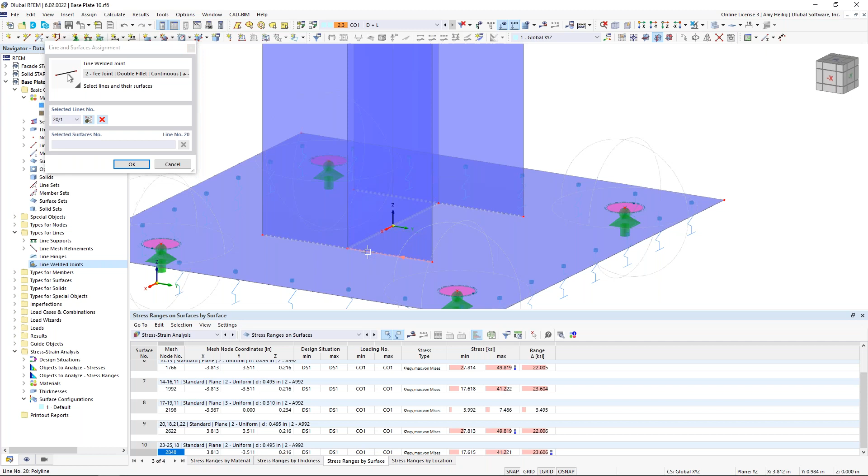I can choose my second line weld joint, choosing my vertical surface, then my horizontal surface. I once again add a new object to choose the lower left flange, this time my vertical surface, then my horizontal surface. And one more time, I create a new object by selecting my right flange with my vertical surface and my horizontal surface, and I click OK.

So now we see all of those lines and surfaces generated here with the relevant line welded joint definition types. Now that we have defined these line welded joints, you'll also notice within my stress strain analysis that we have a new option here called line welded joint configurations.

If we take a look at the default settings here, once again we have the various stresses that we can calculate based on this new weld: the weld throat stress due to normal loads, due to bending loads, shear loads, and so on. For this example, I'm going to activate all of these stresses here along my weld based on those various loads, and then also activate the resulting weld throat stress, which combines all of these stresses into one to come up with that equivalent stress.

Under these special options, this is telling the program how we want to smooth those stresses along the weld in order to calculate the stress design. We can set this to none for right now, which means the program won't smooth those results, but perhaps we're doing a hand calculation. Maybe we'd want to change this to linear or constant for a little bit easier comparison, as opposed to the none option here, which won't smooth over those results at all.

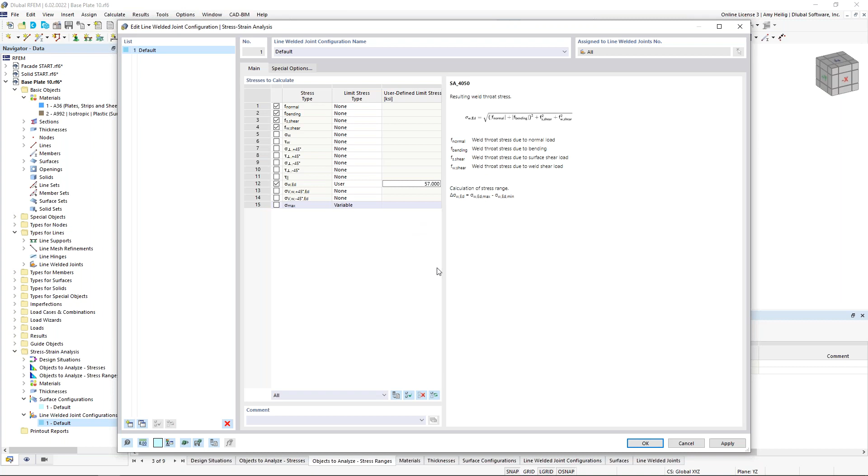Now that we're done with these configurations, we click OK, and under the stress strain analysis input data, notice that we have a new option to calculate the line welded joints, which is automatically turned on. So we can run this calculation directly within the table. The program needs to run through this load combination, and we're still running that nonlinear material analysis, so keep that in mind.

We've already covered the stress design of the surfaces, so rather what we'd like to do is take a look at the stresses in the line welds.

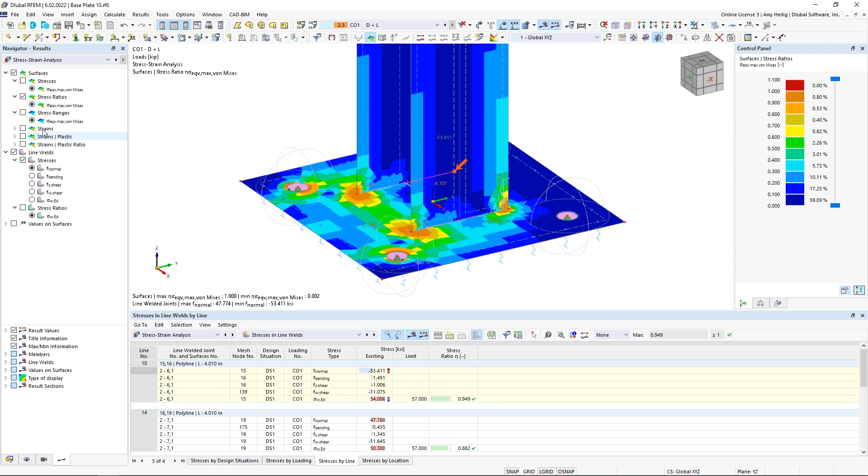I'll turn this to wireframe view. We can zoom in here to see exactly what's happening. We see for each one of these lines that we applied the welds, we have the existing stresses. We have our limiting stress here for that equivalent resulting weld throat stress, and then we get a stress design ratio as well.

We also have the options to view these graphically here, and you can see the line weld stresses. We can change the view of these. That option to smooth over the results, this is what I was referring to. Essentially, the program can set this to a linear distribution, or constant, again if we're maybe comparing to hand calculations. Otherwise, we won't have any smoothing going on. And of course, the stress ratios are shown here as well.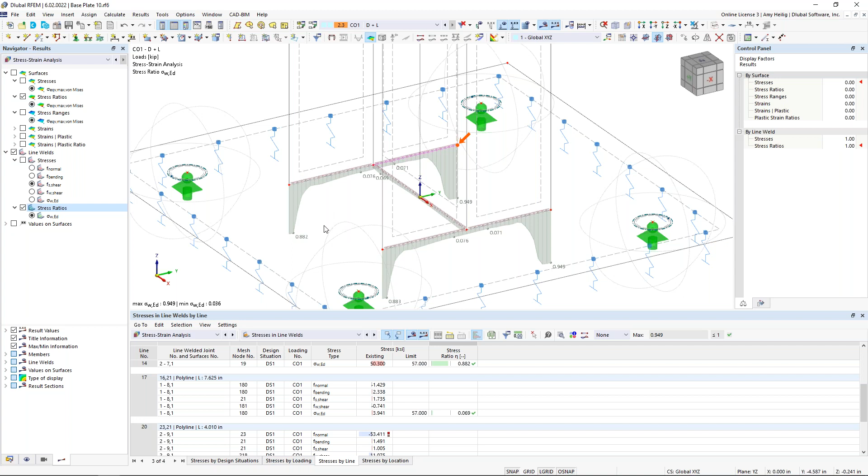A great new feature that we added within RFEM 6 that will be helpful for some of these FEA connections. All right, so we will move on to our final example today, and this one should go rather quick. This is a 3D solid.

Notice that I went ahead and modeled everything here, and we have all of these available surfaces in the model. When we're modeling solids, we set the boundary surfaces to define the solid by choosing the stiffness type without thickness. So there's no thickness, no material. We're simply using them because when we generate our solid, notice we have the boundary surfaces. And with the solid element, we do need to give it a material. In this case, I gave it the material A36.

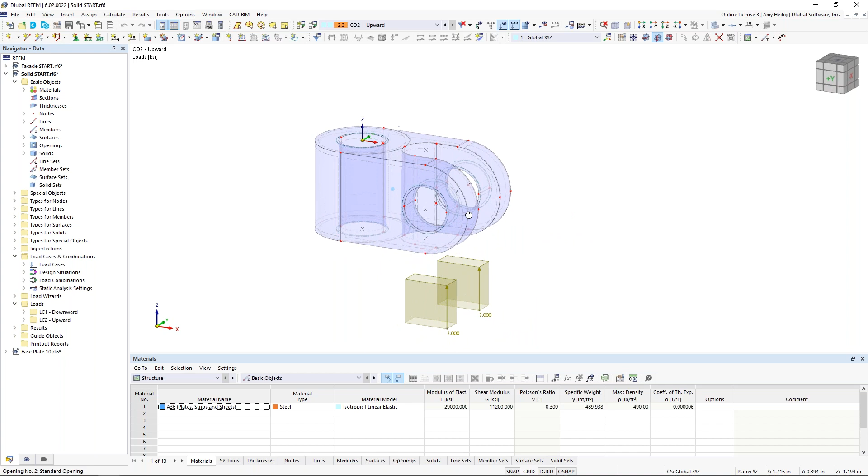I also have a couple load combinations already generated. We have an upward load here right through the openings of this solid, and we also have a downward load. So these two load combinations are going to be categorized under my design situation.

We want to right click here to visit our base data, and this is where we can turn on that stress strain analysis. We click OK, and now we get that additional folder over here on the left. Similar to what we saw previously, we now have a solid configuration. So we double click on this, and of course this list looks a little bit different because now we're working with a 3D element, so essentially FE elements in all three directions.

We have some suggestions here, such as the maximum shear stress, the maximum axial stress, but we'll go ahead and just check the von Mises stresses once again. We see the relevant equation given to us here. The program should refer to that 36 KSI for the limit equivalent stress.

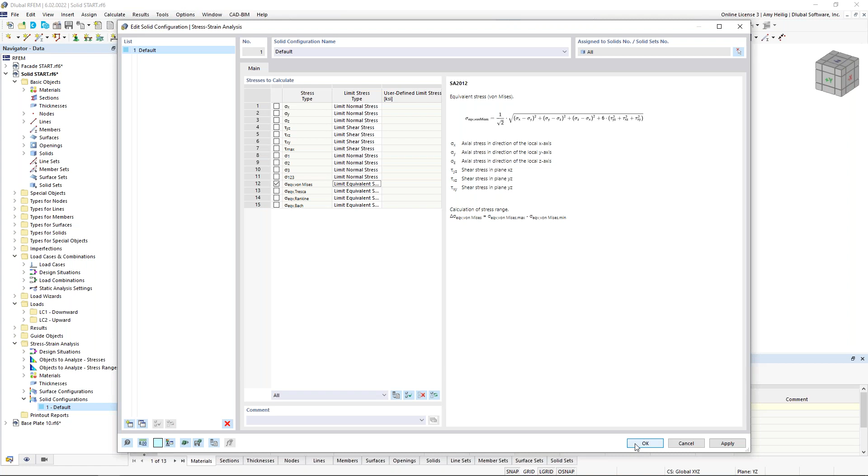Once we have set the configuration settings here, we can click OK. Under the stress strain analysis, we can take a look at the design situation as listed here, but under the objects to analyze, we don't want to design these surfaces. We'll actually just end up getting an error anyway that we can't design them because there's no thickness or material assigned to it, but we will design this solid.

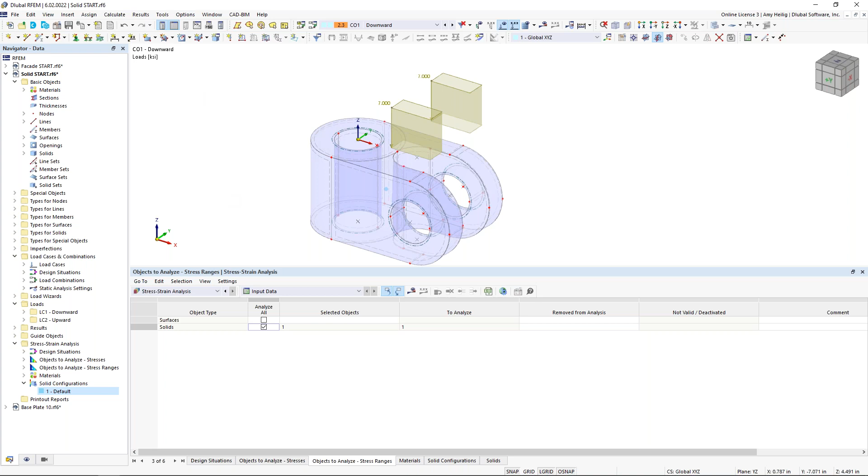We also can activate that stress range if we'd like, and realistically, we can run our calculation. So we go to calculate, calculate all. Very similar workflow here for our 3D solid. We're going to essentially calculate the load combinations, and then once the program is done doing this, it will move on to the stress design within that add-on.

Notice this does take a little bit longer because we've introduced FE elements now through the thickness of this object as well. But once we're done with the calculation, we're currently viewing the static analysis here.

We can take a look at our stresses, for example, such as the von Mises stresses, for that downward load as well as the upward load.

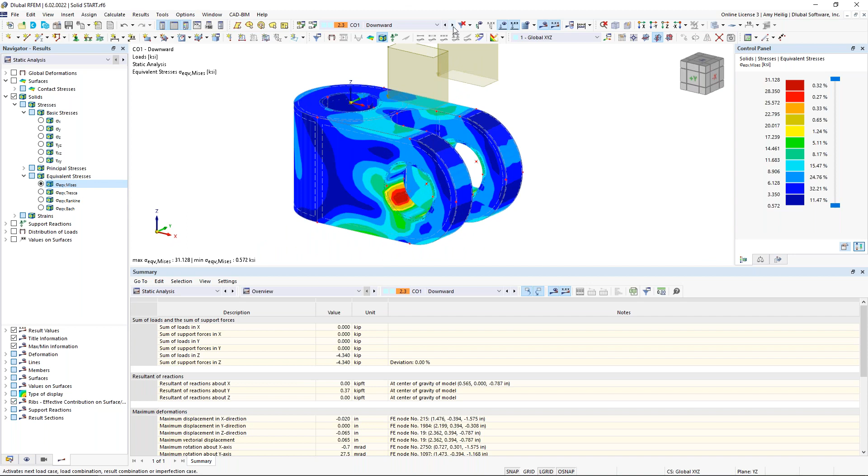Jumping to the stress strain design, we can view the stresses on the solid. We see here the existing stress from the von Mises, our limit stress of 36 KSI, and the stress design ratio of 0.865. We also can view those stress ranges on the solid: the minimum stress, the maximum stress, and the stress range.

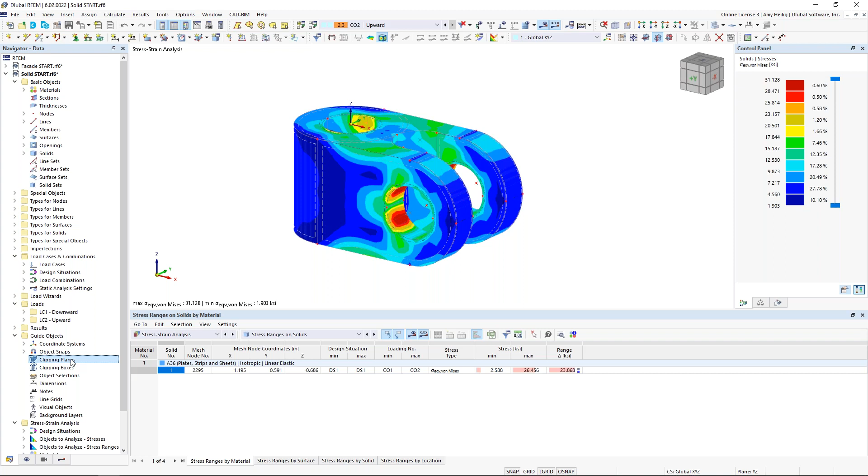Just a couple of quick features I wanted to point out with the solid element that are either new or improved in RFEM 6. If we go back to our navigator under the data, under guide objects we have clipping planes and clipping boxes. If we create a new clipping plane by double clicking here, we can create multiple clipping planes at angles, define them by 3 points, or simply offset from the XYZ axes. So perhaps I set this parallel to the YZ axes, and I can set my origin graphically by clicking within the model. I click OK and set.

Let's go back to the static analysis and view our von Mises stresses. Notice you now can view those von Mises stresses throughout the depth of the element, or kind of in the interior of this solid.

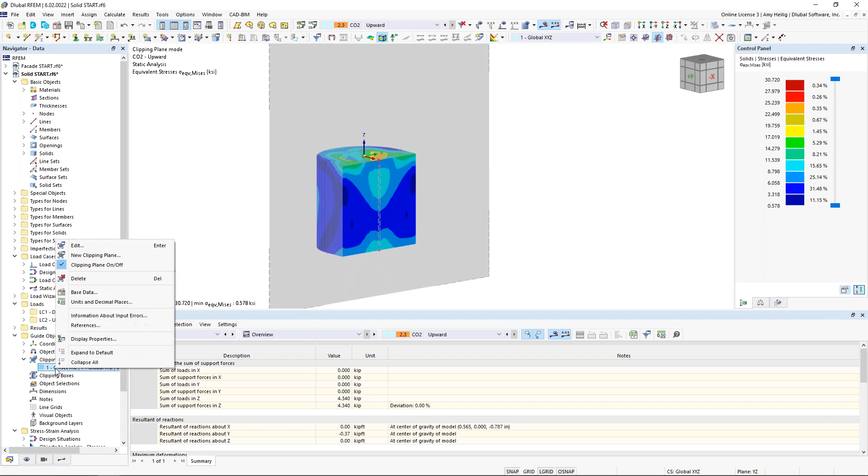We also can go back to that clipping plane. We can double click to edit it and invert it, if we're interested in seeing the other side of those von Mises stresses. So you can see that we can create multiple clipping planes, and we can simply turn them on or off by right clicking here and deactivating it. Now we're back to the full view.

Same concept for the clipping boxes. We can create a new clipping box here and set the origin. This time, with the clipping box, we need to give it 3 dimensions, so we'll give it 1 inch in the X direction, 1 inch in the Y, and 6 inches in the Z. I click OK and set active. Now we have this clipping box throughout the depth of that solid, to view the stresses in the interior within these defined settings. Again, we can create multiple definitions and turn them on or off by just right clicking. So that's a little bit more efficient now in RFEM 6 for viewing various results with those solid elements.

Okay, so the final thing to touch on quickly, as I know we're running out of time, is just a very quick printout report. We can create a new printout report up here in my toolbar, or down here in our navigator, by creating a new printout report definition.

The program gives us all of the various input as well as results that we can turn on and off. We also can load some saved templates, including default templates such as the stress strain analysis, where we've turned on some of the information we think you'd be interested in. You can also create your own template for the printout report.

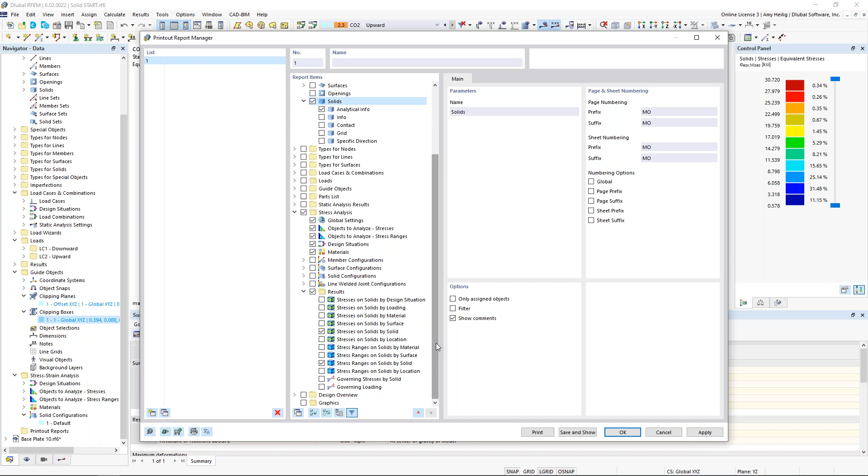For today's quick example, I'll go ahead and uncheck everything here, and right click to collapse all these folders. We're only going to activate the basic objects. I'll activate my solid input data, for example, and then under the stress analysis, I'll include some of this input data as well as my results. We'll view the stresses on solid as well as the stress ranges on solid, and I can simply click Save and Show. What the program will do is open up a separate application here for my printout report.

So pretty small printout report for today, but you can see here our header, and we can modify this logo to maybe our company's logo instead. We can modify a lot of this input data. We see here a nice picture of our solid, and of course our input data in table format as well as our results. So pretty quick printout report for today.

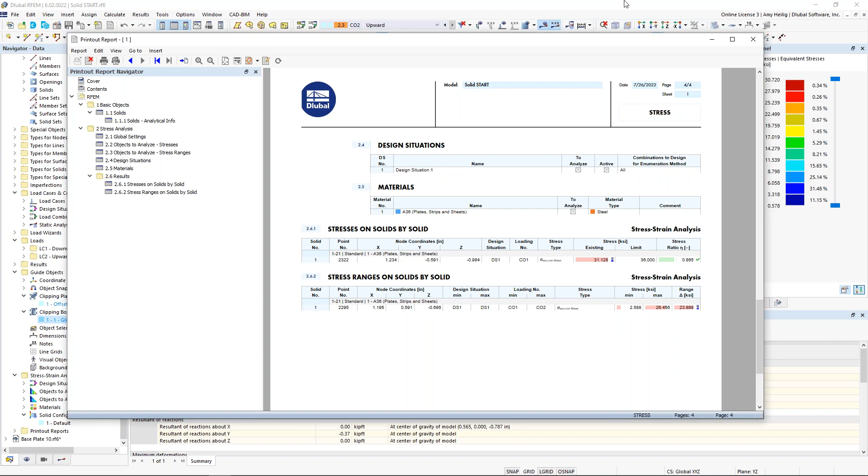What we can do is actually drag this printout report to a second monitor and work concurrently within the RFEM program, so any modifications will actually update in the printout report in real time. Perhaps we'd like to add just one graphic to this printout report quickly, and currently I'm viewing my results here for this upward load.

And remember, we have this set at our von Mises. So I'm going to add this particular picture to the printout report. We have a nice feature here under the display called isobands, and this is new within RFEM 6 - we can activate what's called the gray zone. The gray zone allows me to set certain percentages of stresses that I'm not so interested in, so notice those low stresses are now grayed out. We can continue to increase this until we're content with viewing only the stresses of interest, while everything else of lesser interest is grayed out.

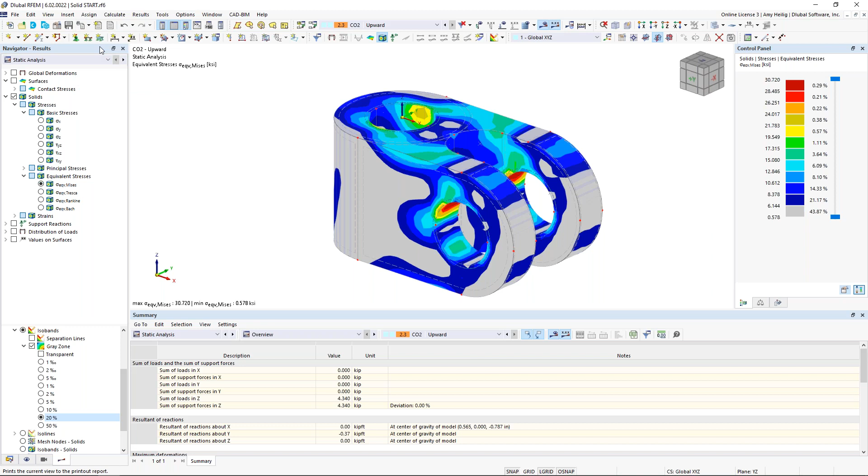So we're ready to add this particular graphic to our printout report. We go up here to print the graphic to the printout report, and we can make some changes here. Notice this is set to window filling, so the picture is zoomed in to take up the entire page width. I'm also going to activate the 3D picture in the PDF - this is currently off by default, but we'll activate it. If I click Save and Show and drag my printout report back here, we'll see this picture added to the printout report.

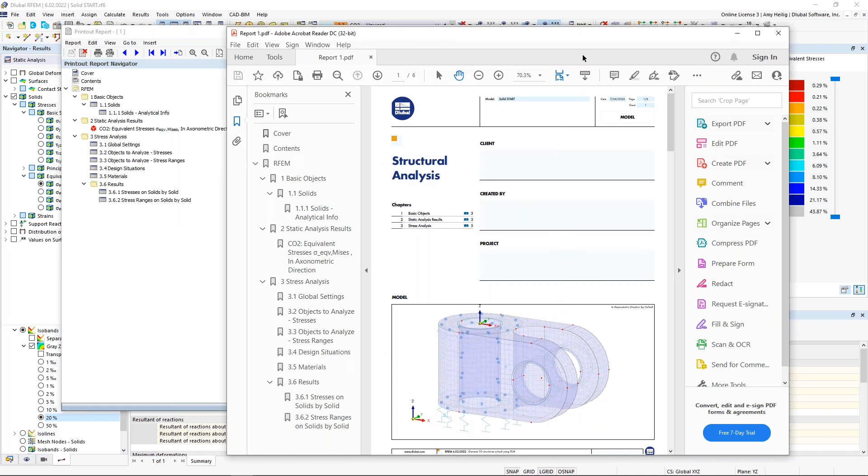Now, nothing seems so special about it now, but if we take this report and export it to a PDF, choosing a location on our computer and saving it, the program will automatically launch whatever PDF application we're using. In my case today I'm using Adobe, and we see the same printout report. Scrolling down to that picture I just generated, you'll find that this is a 3D picture. This is really nice in the sense that within this PDF we have the ability to rotate and view those different stresses however we see fit. It will be nice to send to clients, especially for objects where we don't want to create multiple printouts of different orientations of the stresses, but rather can just send them this 3D picture directly. Just wanted to mention that's a nice feature within the program.